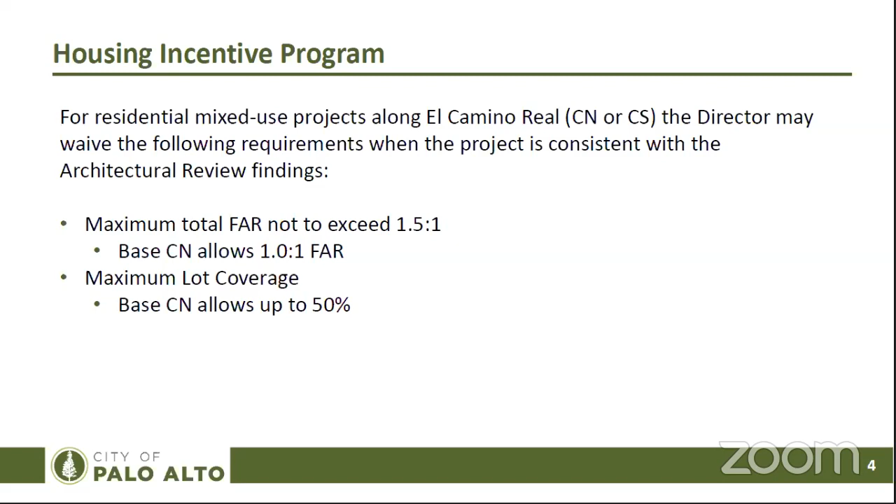So the applicant did revise in response to the board's initial comments the following. They did reduce the office square footage. They put some of that square footage back into the residential units. And in reducing the office space, they were afforded to reduce the amount of parking on the site. So in doing that, they actually added some more landscaping in the rear. You see that in site plans, some permeable pavers, and also 2 larger trees that could be accommodated in that rear parking area now.

Project does formally include about 2,300, 2,400 square feet of commercial space. It's about 0.38 to 1 FAR. That does include some shared space, 3 residential units, totaling 4,500 square feet. So it does include some shared space, and that's 0.72 FAR. The total FAR is 1.1, and the site coverage is 60%.

So some of the notable development standards that's important to show is that in the CN district, you have to, for other projects as well as on El Camino Real, show that you have an effective 12-foot sidewalk. And the first floor of this project is set back about 5 feet to accommodate that. There's an additional 5-foot setback for the street side, which is on Matadero. And so you wouldn't get that in the downtown area. You have a 0 setback requirement there.

And open space covers 35%, and the parking lot shade canopy, we'll get to more detail about that. The requirement is 50%, the maturity at 15 years. In addition to these zoning requirements, you have the South El Camino Real design guidelines. And for properties that are in this retail node district, 75% of the frontage needs to be built to that setback for El Camino Real. And then likewise for the side street, 50% needs to be built to that setback.

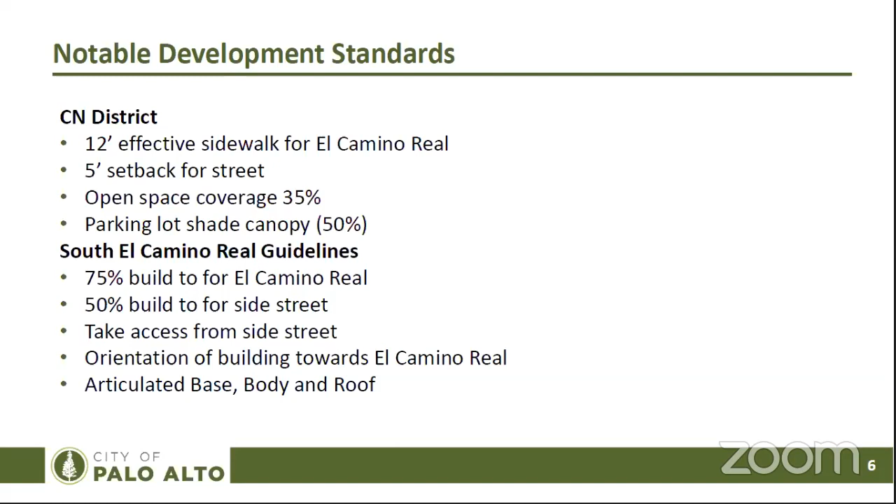So some of the project comparisons from before: the left side shows you what was previously shown, the right side is what's presently shown. And at the board meeting, there wasn't really a direct direction to change necessarily the architecture of the building. It just said to consider the El Camino Real guidelines and demonstrate compliance with those.

So the applicant didn't change the front of the building, but in the rear of the site, as a result of removing some office square footage, they're able to put in some more landscaping. You can notice that there are a couple of trees on the opposite side of the driveway there. There are 2 London planes, so those are actually street tree size trees. So that should make a difference there.

And then here you can see in the site plan view the changes that they made. Again, it's really to the rear, but since they were able to remove one of the parking spaces in the puzzle lift, now you have that extra 8 feet or so of landscaping at the end of the driveway. And that's where they could put the long-term bicycle parking spaces. They moved that from fronting the alley. And then they added the 2 trees there as well.

And you can see in the back where you have all the other utilities, such as the transformer pad, the electrical switchgear, you have the trash area, you have the parking. The surface parking is required. When you have mechanical lift parking, you need to have surface parking. You can't put accessible parking in the mechanical lifts. And you need to also provide for the pathways to these accessible parking spaces.

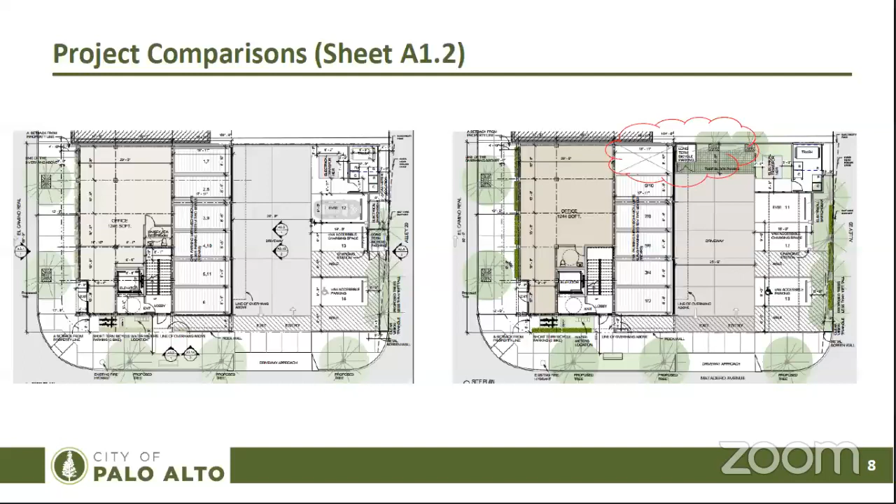And again, as I mentioned, you have the overhead utilities there, so you're limited in the size of the trees that you can put along that alley. So here you can see the project is one story taller than the adjacent properties. The first floor or base of the building is consistent with the neighboring building, maintaining that rhythm and pattern.

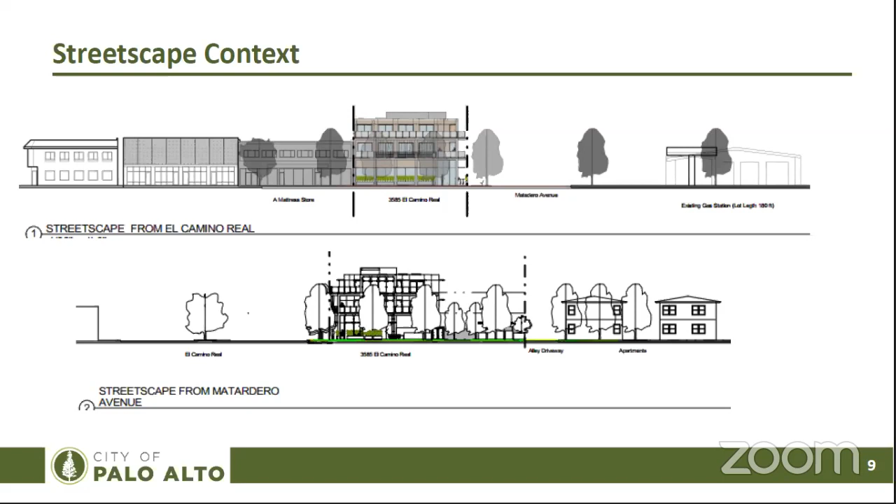So the parking lot shading is a requirement in the parking code, and specifically it states that surface parking areas shall include tree plantings designed to result in 50% shading of those surface areas within 15 years. And it does specify the size of trees that you need to put in there at the time of construction. So this project, again, showing the areas that need to be shaded. That's the driveway, those parking spaces there.

With the revision of the project, the applicant was able to add additional trees at the end of the driveway. These are London plane trees, as I mentioned, the same as the street trees that are proposed. So they'd be really nice canopy trees. And the other trees along the alley are Japanese maples. They're very slow growing. They're small canopy trees. Those are something that the utilities department can allow underneath power lines. The surface spaces are semi-covered spaces with vines growing on the structure.

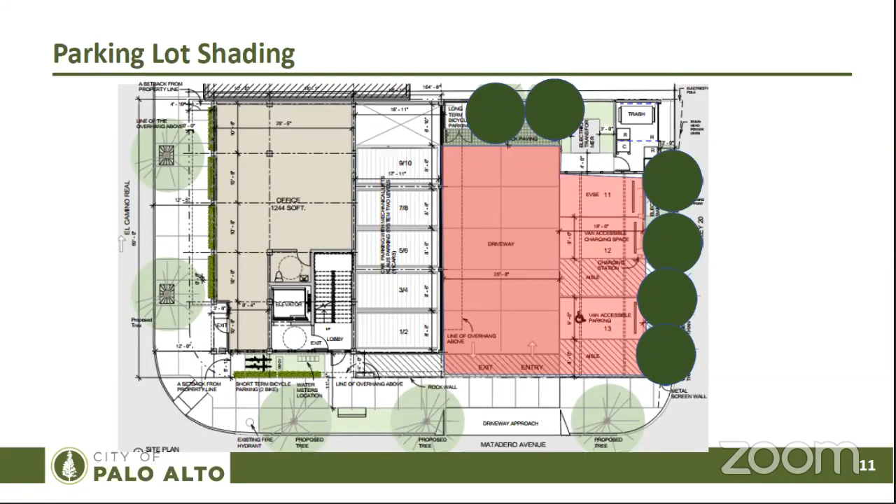And the applicant did look at some other alternatives here. They did look at a basement alternative in the past. You can see on the left, the project would take access for surface spaces along Matadero on the side street, as well as the alley to get ramped down. And you can see with the ramp meeting the code, there's not really sufficient backup space to those spaces. And even if you look at the surface, you still don't even have 50% shading there on the site. So they're still problematic, even when you look at a basement alternative.

Probably could have pushed them in different ways here to see maybe different configurations, but it is challenging given a basement that leads to an alley. The cars coming up that ramp have their headlights into the adjacent residential. That's pretty tough. And the trash space here probably isn't sufficient on the surface here. There's a lot of challenges for having this space be an alternative.

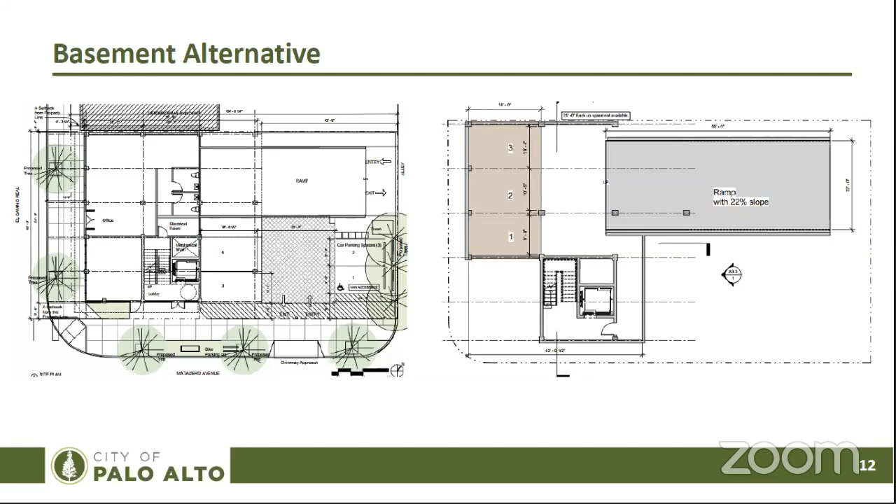And then on the other side of the graphic, you can see how the project puts all its massing along El Camino Real. It's consistent with the South El Camino Real guidelines, putting the parking stepping down to the alley, having that buffer with the residential units.

This is really important if we go down the variance path. This is the first finding that needs to be made, and it's because of special circumstances applicable to the subject property, including but not limited to the size, shape, topography, location, or its surroundings. And so it's not just the lot itself and maybe something that's wrong with it. Like a lot of times you think of there's a huge grove of trees or large boulders that we can't move. I mean, it's also its location and surroundings.

That the strict application of requirements and regulations prescribed in this title substantially deprive such property of privileges enjoyed by other property. And I think that's where we've tried to make those findings in your packet today. And hopefully my presentation will demonstrate that. Some other things about the project: we have below market rate housing. The project will make an in lieu payment for that. That number is 0.45 units, so it's a fractional unit, therefore we're subject to the in lieu payment. Mechanical lift parking also is a condition regarding the operations and maintenance in case there's a breakdown.

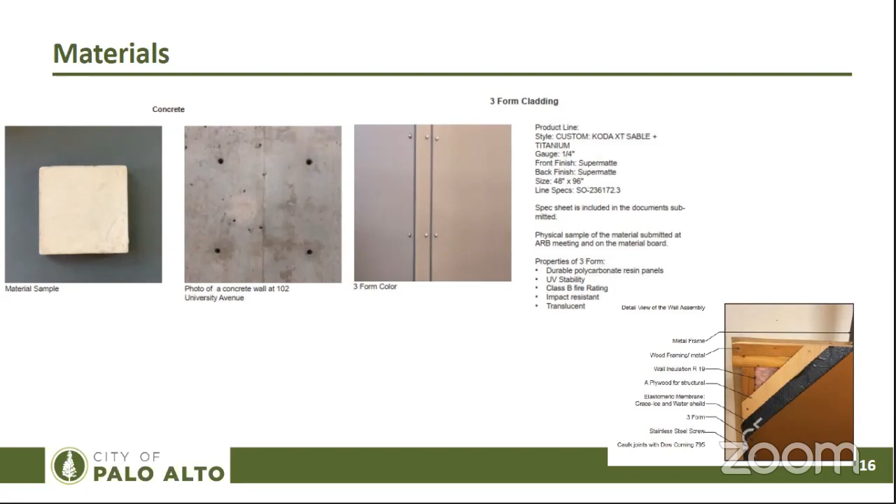And then just going into some of the materials, and the applicant can probably go a little bit more into this. Hopefully you've had a chance to look at the materials at the display case, or they were available online as well. They're using some concrete with slag, which is a more sustainable type of concrete. And there's 3-form cladding, a different type of material. The glass railings and their application here. There's some glass overhangs that are being used as well.

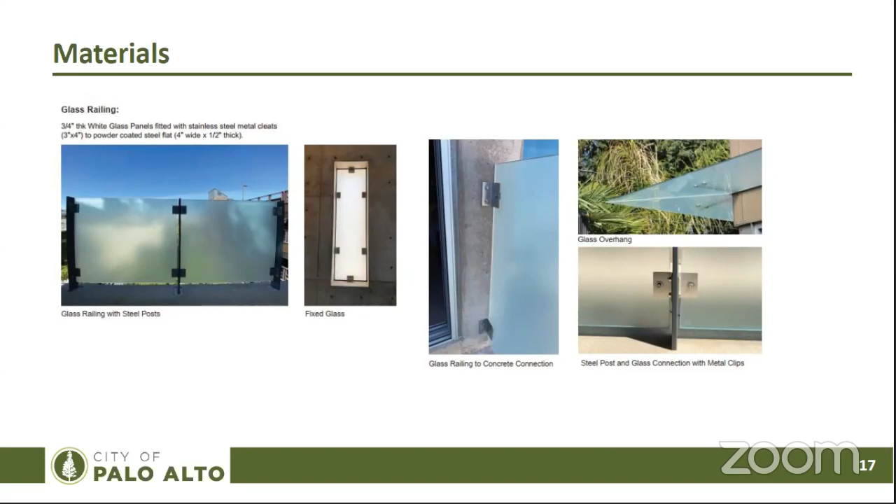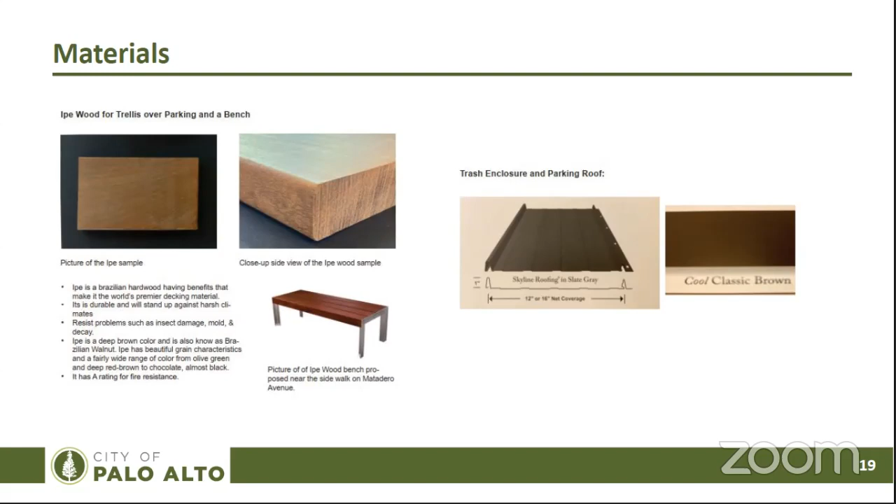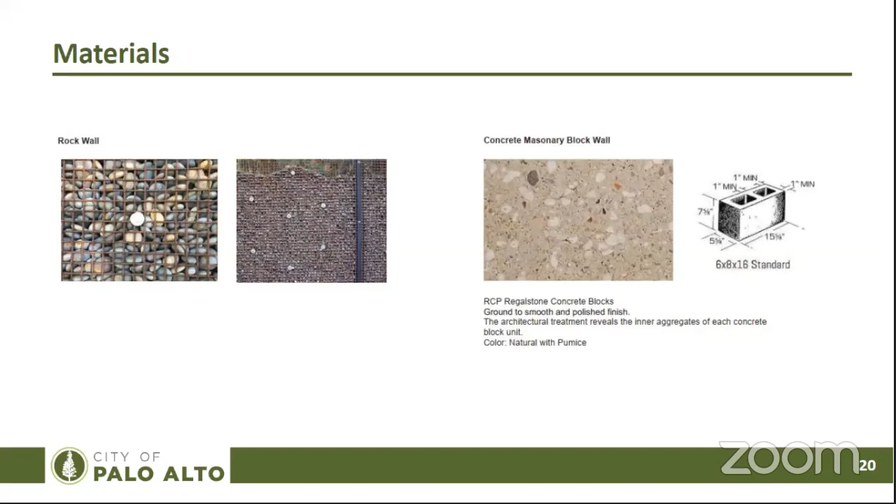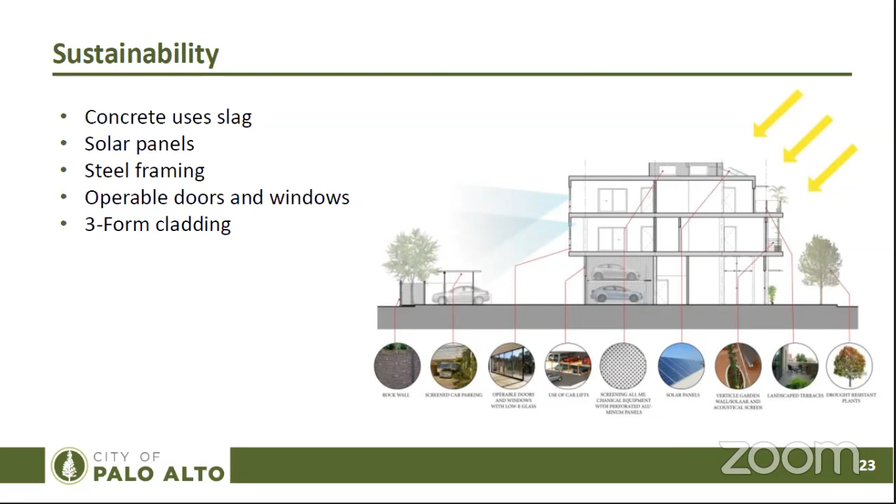And then this is just one of the findings of the architectural review, which is sustainability. The project uses concrete that has slag, which is a sustainable material. There are solar panels on the roof. It uses steel framing, which is a renewable resource. Operable doors and windows, and that 3-form cladding doesn't require paint, I believe, so it's a little different.

And then for CEQA, we are currently in circulation with a mitigated negative declaration document being circulated from May 1st through June 1st. And the impacted topics are all construction related: air quality, biological resources, cultural resources, some hazardous resources, and noise, more specifically vibration. And all these mitigations proposed can reduce these impacts to less than significant.

So in conclusion, we want to conduct a public hearing. The project did respond to the ARB comments. The project is consistent with the architectural review findings. We want to consider those variance requests by the applicant, and we want to complete the CEQA process. So the recommendation is to review and consider the initial study and mitigated negative declaration, and I recommend approval of the project to the Director of Planning and Development Services based on the findings and subject to conditions of approval. So that concludes my presentation. The applicant has their presentation, which I will operate, and then we'll go ahead and get to any questions you may have.

Thank you very much, Sheldon. Does any board member have a question for staff? Yeah, I have one. Go ahead, David. The enclosure for the long-term parking in the back, is that a requirement for the retail or the residential portion of the building? It's for both. They're both combined there. Okay. Any other questions?

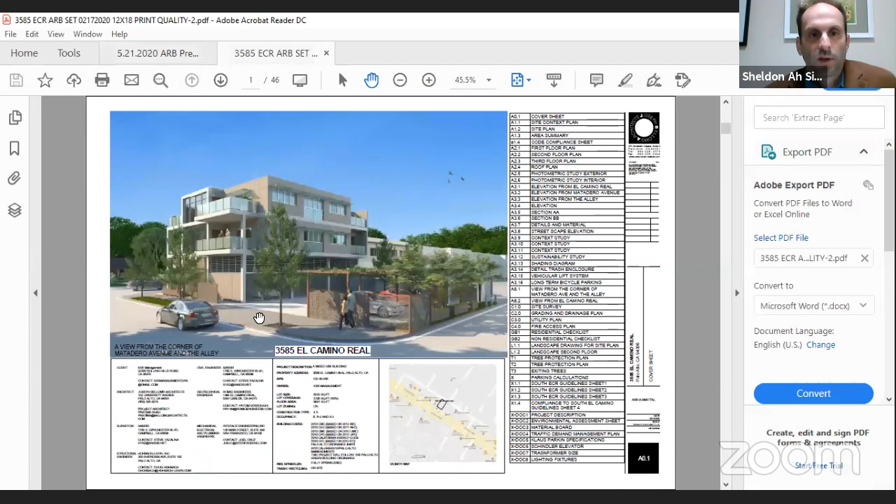I asked this because on the applicant's drawings, it seemed that they were including a much larger area for what the surface parking area was. Can you say what percentage is actually shaded with the application right now? To what extent are we asking for a variance? Yeah, I think if we look at that sheet, we're showing like 200 square feet of the parking lot being shaded. So it's a very small percentage.

I know they have another exhibit, but basically that 200 square feet is in this area here. These areas, they're not included. These other areas are not included. So really, it's a very small area that's included. But can you say what the percentage is? The code says they have to be 50% shaded. What percent shaded are they right now?

Yeah, I'd have to look at that sheet, and I think while the applicant is giving their presentation, I just have to do the math here. But again, they're only doing this. This is the only part that's shaded. So we just need to take this area here, and this. I mean, it's very, very small. It's not very much, but I can get that for you. Okay, thanks. Any other questions?

Osma, no? Then can we go on and see? I have a question about that issue, Peter. I thought it was stated in the text somewhere that the shading is about 26 or 27% relative to the 50% requirement. That's the number I'm looking for. Sheldon, it seems hard to see how that would be 25% on this drawing in front of us. Yeah, I think if you give us a minute, we can find that number for you, maybe after the applicant presents. That's great, Jody. Yeah, just at some point as we discuss this.

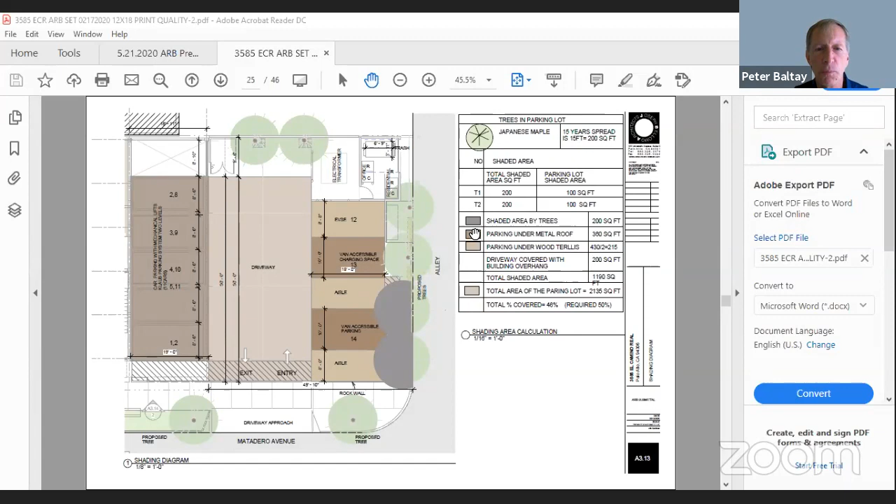With that, can we move on to the applicant presentation? Do we have the applicant here, Vin? Could you get them on board for us, please? Yeah, so I believe the applicant is Pratima and Joe. So I'll go ahead and promote those two to panelists so that way they can speak and also share their presentation.

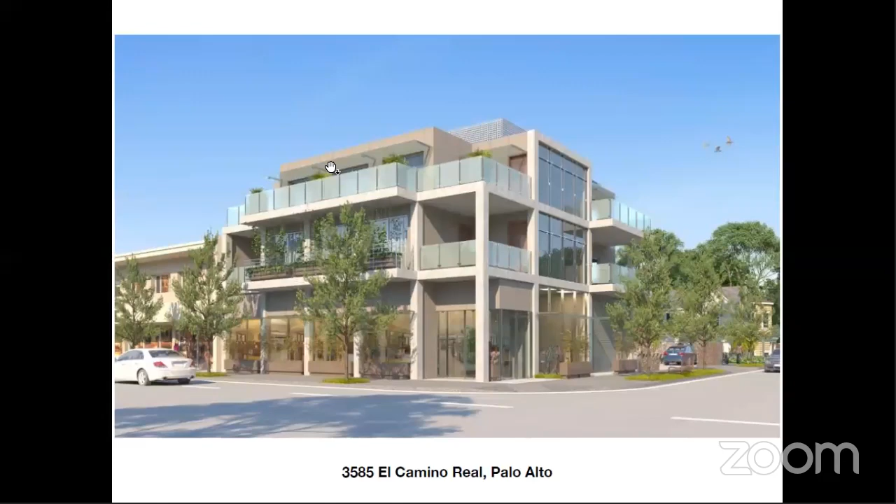I hope they speak clear. And Vin, I can hardly understand you. Oh, I'm sorry. Can you guys hear me now? I hear you, but you're still not clear in my hearing. I can hear you pretty well. Maybe consider raising volume. No, I'm fine on volume. Peter, you're muted. Joe and Pratima, I see you have joined the meeting as panelists. If you can connect your audio, you can speak. Welcome, Architect Palomo. Joe, there seems to be a lot of echoing on your side. Are you perhaps running the meeting on TV or another computer? Sounds like two sources of audio. It looks like Joe just exited. Pratima, are you there?

Yeah, since both of us are in one room, I will be sharing my presentation and my mic, so we don't have echo. Okay, sure. Thank you. Please take your time until you're ready. The technology can be challenging and we're very eager to hear your presentation. Can Joe log in after my presentation again? He can log in now. He just needs to mute himself if you guys are in the same room. Yeah, we're in the same room. Just give us a second. Can they hear us now? Yeah, they can hear us. You want me to start it off then? Please go ahead whenever you're ready. Give us just a few seconds and then I'll start. You can hear me, correct? I can hear you fine. You will have 10 minutes whenever you start. Okay.

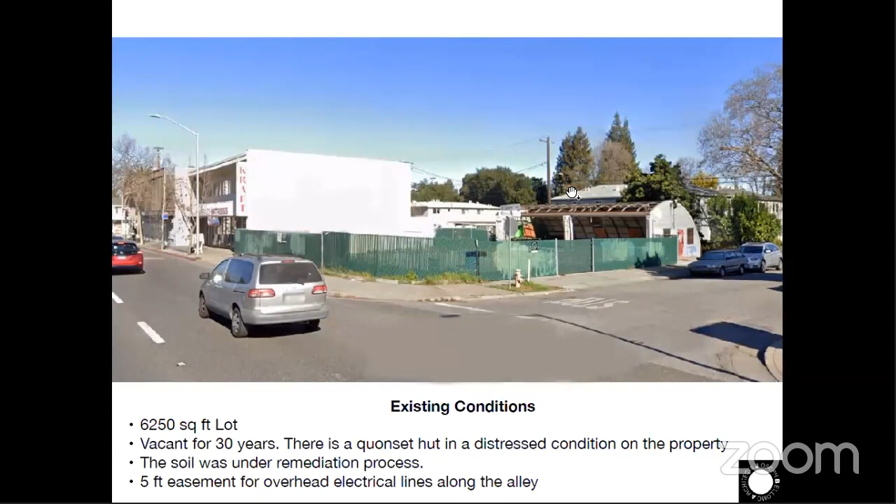The size of the lot is 60 feet by 104 feet. That is about 6,250 square feet. It is a standard size lot for a single family home and a substandard lot for a multi-family mixed use building. The lot has been vacant for the past 30 years because the soil was contaminated and had to go through the extensive process of remediation. Now the site has clean title from the County of Santa Clara.

Next. The design proposal that we are presenting today has evolved after considering different design programs and working with the consultants, city officials, and our clients. I would like to summarize the design proposals we submitted previously. Our first formal design application was in August 2017, where we proposed a 3-story mixed-use building with 2 office spaces and 2 residential units. There was a conflicting requirement of the zoning code for this property.

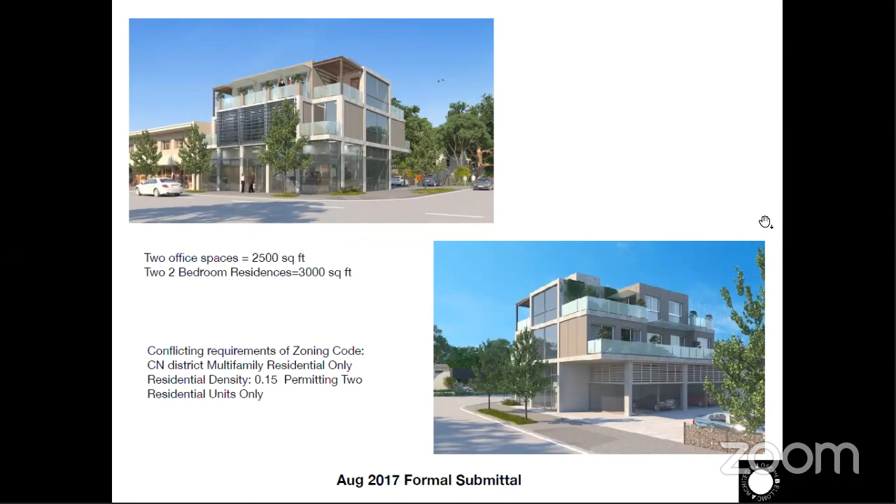The CN district only allowed multifamily residential, that means 3 or more units, and the permitted residential density only permitted 2 residential units, and we had proposed 2. So there was conflict in the zoning requirements itself. Next. We explored other design options for the program, like a 2-story office building only. But an office building had more stringent setback requirements, such as 20 feet from Matadero Avenue. That's approximately 1/3 of the site.

And we also would have lost the opportunity of adding the most desirable housing in the city. We tried the option of a basement with a ramp and a third level of mechanical lift in a pit. Both options were discarded because of the remediated soil condition and to keep the excavation to a minimum. At this point, we had many constraints and we were really concerned about the economical feasibility of the project.

Next. And that's when the housing incentive plan was announced by the city council, which helped us a lot during this process. The following incentives: first, increased residential FAR, then reduced car parking requirement, like one car parking space for a 1 bedroom unit instead of 1.5, and more than 50% site coverage is permitted. We were able to take advantage of these incentives and propose the design, which works for clients as well as the city. Next.

There is no major change in the design program from the previous proposal. The proposal includes 2 office spaces around 2,374 square feet and 3 residential units around 4,500 square feet. In the previous proposal, a variance was requested for 5 feet perimeter landscaping along the parking lot. We have fulfilled this requirement by adding an 8-foot landscape strip at the end of the driveway along the neighboring property.

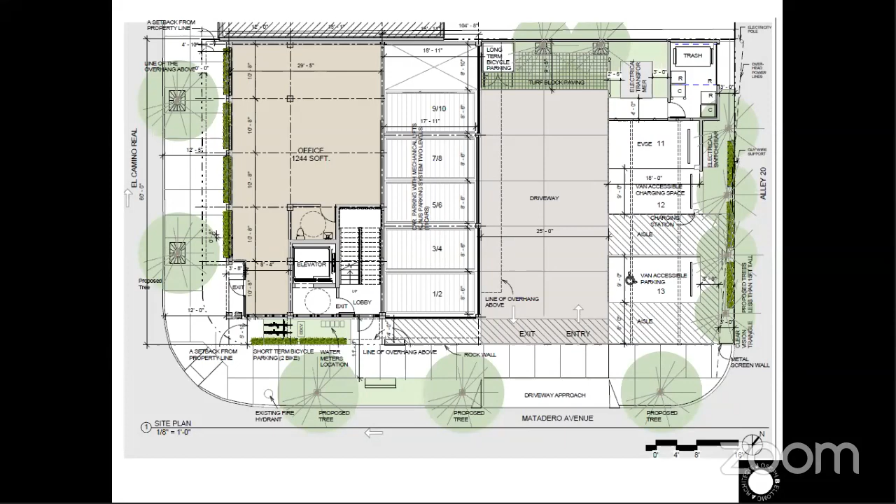Next. The design proposal includes 10 car parking spaces with mechanical vehicular lifts, while 3 car parking spaces are on grade. These on-grade car parking spaces are mainly for the commercial portion of the building, as David asked. Residential will have designated parking in the car lifts. The bicycle parking has been relocated from the alley to the space in front of an unused bay of the car lift system. During the previous ARB meeting, there was a comment or discussion and concern expressed about the alley streetscape.

Relocating bicycles at the new position not only makes the bicycle parking safer, but also provides a continuous landscape strip along the alley. There is a 5-feet easement on the alley for overhead electrical lines. Though we have this restriction, we feel we have created a design solution which beautifies the alley. 4 Japanese maple trees and removable planters demarcate the boundary and beautify the alley, plus create a desirable buffer between the alley and the parking area.

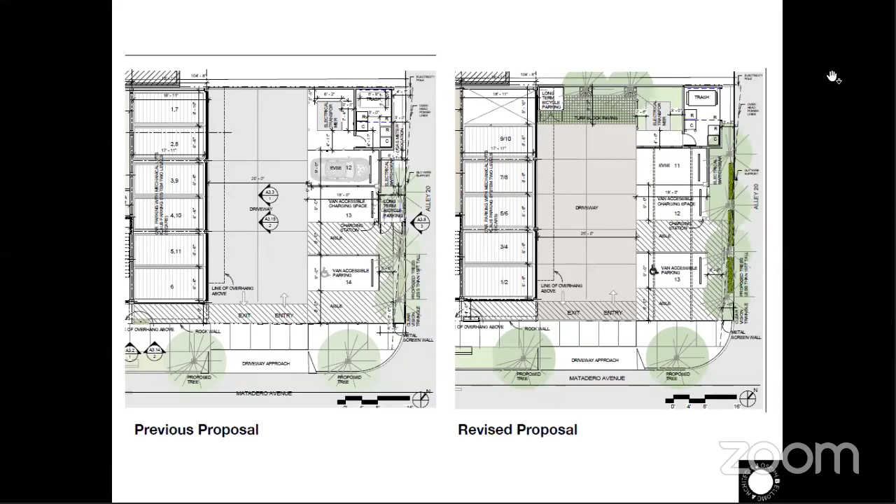Next, another change we are proposing is for the shading of on-grade parking, surface parking. The earlier design proposal included a continuous standing seam metal roof for the car parking area. In this proposal, we have a combination of standing seam metal roof over the parking area and ipe wood trellis or pergola covered with creepers over the aisles. This combination roof will provide required shading for the parked cars. The trellis and the vines, which is an interesting landscape element, will create beautiful views for the users and the neighbors, as well as reduce the heat island effect.

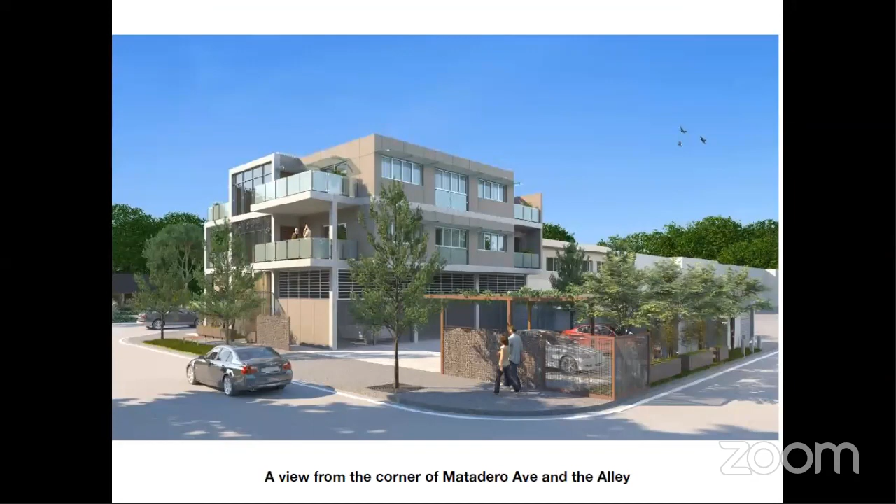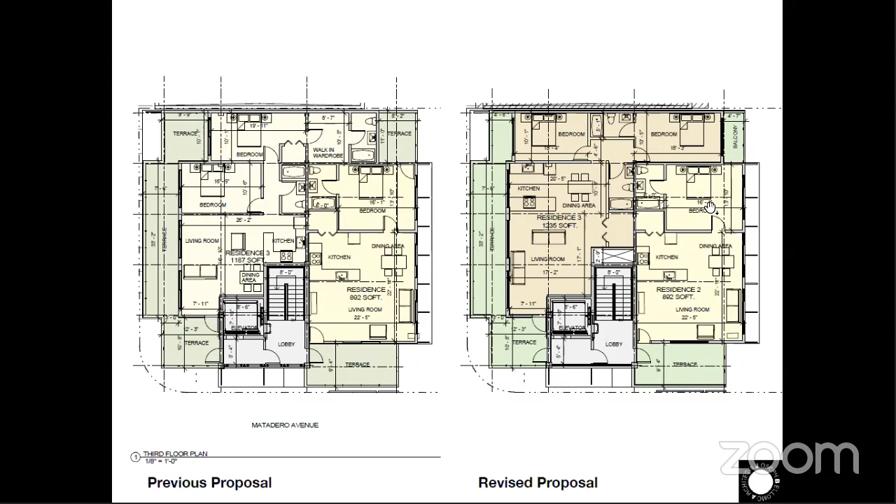Next. The next couple of slides show the revisions we made to the floor plans. Since we reduced 1 car parking space, we had to reduce office square footage on the 2nd floor by around 150 square feet. We have compensated this reduction in office square footage by adding more square footage to the residence on the 2nd floor. Next. On the 3rd floor, we have reduced the size of the 2 terraces, which were closer to the neighboring buildings, and have increased the square footage of residence number 3. We are still able to fulfill the requirement of 150 square foot of open space per residential unit and overall landscape or open space, as we have added more landscaping on the ground floor. Next.

Now I will proceed with the response to the ARB comments. We have submitted a virtual material board which has pictures of the material samples, brief specifications, construction details for a few materials, and pictures of the materials in use at our previous project. A physical material board was submitted at the previous ARB hearing and now at the plaza. We have a mock-up of a 3form wall and a 3form edge detail and a connection detail of steel frame and glass or 3form panel. I will show these mock-ups once I connect to the camera. Next. This is the picture of the mock-up and the slides.

Next. There was a concern expressed on how the building responds to its surrounding residential neighbors and the location of the trash enclosure. As explained previously, the design has a beautiful landscape perimeter strip along the alley. The view of the parking is screened with movable planters, Japanese maple trees, and rock walls. The standing seam metal roof and ipe trellis with creepers form an interesting roof pattern. The entry of the trash enclosure is in front of the staircase of one of the residential buildings, and it's not right in front of the door. The trash enclosure is fully enclosed with an overhead rolling shutter. The vehicular entry and exit to the site is from Matadero Avenue, thus it reduces impact on the alley traffic.

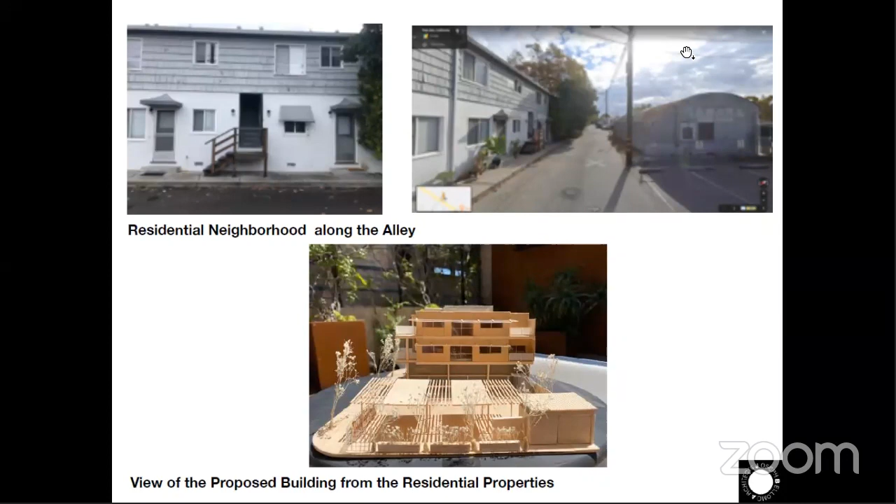Next. As mentioned in the previous hearing by the city staff, today's ARB discussion focuses on the South El Camino Real guidelines and compliance to it. One of the main concerns was about guideline 4.1.5, articulated facade, base, body, and roof. As per the guidelines, the building does have an articulated facade and expresses the use of its space. For ground floor office use, the building has an exposed concrete column frame and a concrete slab with glass walls. This maintains the rhythm of the neighboring storefronts.

The middle floor office use has an overhanging balcony with solar screening landscape elements, a vertical garden, which is a distinct feature and relates to the neighboring building. The top floor residence is cladded with 3form and does not reveal the structural system. The residence is recessed 8 feet from El Camino Real and 16 feet in the corner to reduce the massing of the building and relate to the context. So from the pedestrian view, the glass guardrail for the terrace is more visible and acts as a parapet and relates to the two-story neighboring building.

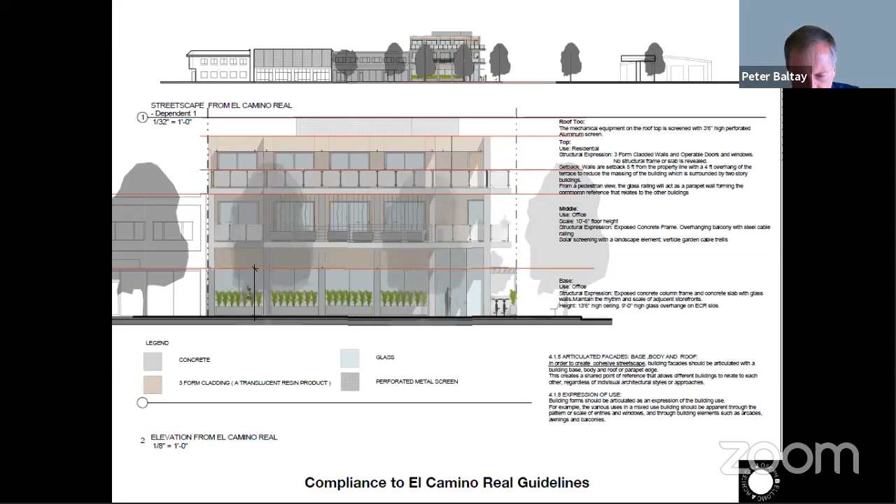The building uses similar architectural elements of the neighboring buildings like storefront, balconies, parapets, and forms a strong connection with them. You're at 10 minutes now. Could you wrap this up within a minute, please? Yes, I'm on the second last slide, so I will be able to finish. Thank you. As per ARB members' suggestions, we explored a couple of design solutions, and we think the proposed is the best one as it satisfies the intent of the guideline and forms a strong connection with the neighboring building.

Next. The main important variance issue about the site is the 50% parking lot with trees requirement for surface parking. I feel we have a unique situation here where 10 of 13 cars, that is 75% of the cars, are parked in the vehicular system and 3 are parked on grade with a shared driveway. The code does not address this situation. There are 13 cars parked. If all 13 cars were parked on the surface, it would have covered 3,800 square feet.

And that is almost, we have reduced 50% of the surface parking area requirement. Code intends to reduce heat island effect by providing shading in the parking with trees. 75% of car parking is under the building and the remaining is covered with landscape elements and trees. Also, it is located on the north side of the property, so part of the driveway will always be shaded, as shown in the picture of the model.

With this, I would like to conclude my presentation. We tried our best to respond to each and every comment, and we are really satisfied with the proposal we have, and we hope ARB recommends this too. Thank you very much for the presentation. Do we have any questions from the board for the applicant?

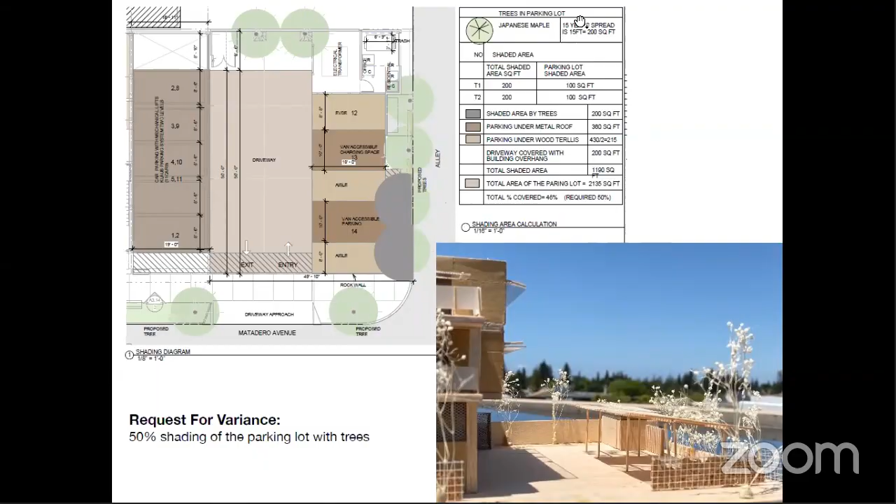Yes. Go ahead, Osma. Well, I wanted to ask, it sounded like there were some mock-ups of the material that we were going to see via video. Is the board interested in seeing that? Okay. I am. Okay, I'll turn the video on and show it. Can you tell me how long is this video? It's not long. I'm just going to show the mock-up by camera. Okay, at the request of Board Member Thompson, we'll look at the video. It's not a video, it's just their camera, so we can see it.

Are you able to see, Osma? Yeah. Okay. So this is the mock-up of the wall with 3form. So we have a steel frame, and Joe, maybe you can explain it. So is that concrete color and that 3form brown color correct in terms of what will be used on this project? So this mock-up we made with the material that was available at the workshop. Because it's a special order, the exact color sample of the 3form was submitted at the ARB meeting.

It looks very similar to the one that I saw on the material board. I mean, the material board one maybe looks a little darker. My material sheet gives exact specifications of the color, and that matches the true color if you see the virtual material sheet. Yeah, I went and I saw the material board. Yeah, and I have to show the other mock-ups too. I'm interested in seeing the corner. Yeah.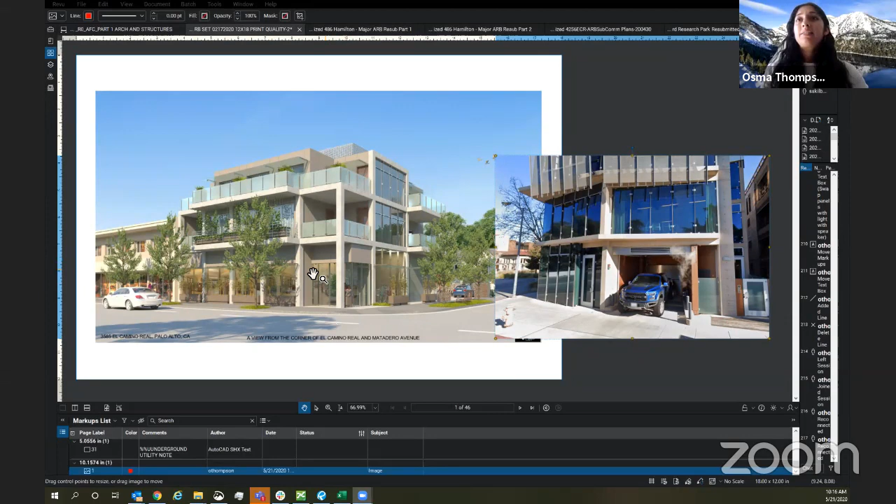And I sort of disagree, Board Member Lee, that the materials change from base to middle to up, because these two materials are consistent the whole way. And I think it's important, even in the elevations, these are really showing kind of like a light sandy color, but they're not a light sandy color. And that's not to say that sandy is better. I'm not saying that. I just would like a bit more transparency in this application as to what this material is and how it will really look on the street.

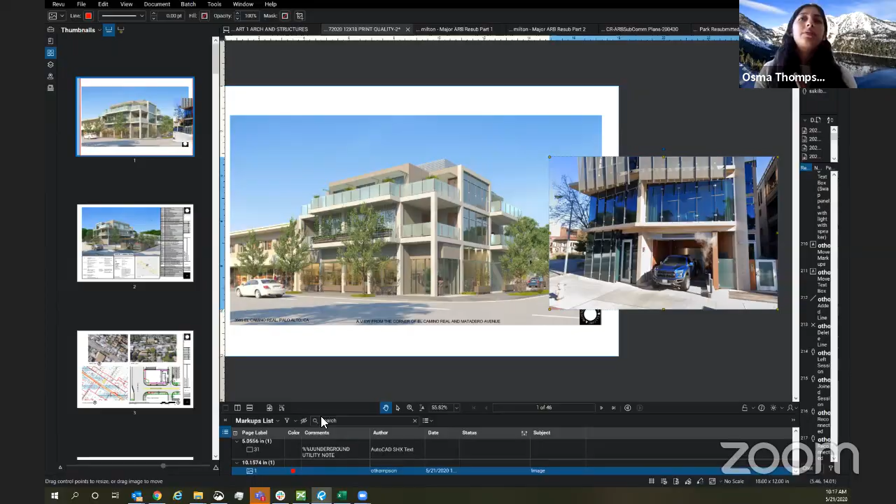And so to go back to the base, middle, and top, I do appreciate Board Member Lee's comments. It actually sort of gave me a bit more perspective, but I do think the top, the roof, is very unarticulated, and I appreciate the setback. I still really like the terracing effect. So it does make the facade at El Camino seem smaller than it really is. But I do think there is some work to be done up here in terms of adding scale and articulation. So I will stop there, because I think that responded to all of the points that we've all been discussing.

Thank you, Osma. I have to admit, I find your comment about the 3-4 materials spot on, and I'm glad we shared your screen. It's dramatic, the difference from the rendering, and I think you're right. We need to see something that shows what that color being much browner and redder like that across the whole building will only tie the 3 floors together, and that might be an issue.

To Board Member Lee, I say that I think we have to be careful assuming staff will monitor things like the kind of metal perforations. I don't think they look at that too much. It says perforated metal, there's submitted perforated metal, it goes through. It's really up to us to do as Alex suggested and get a recommendation, get a specification now that we can hang on. The staff is really looking to us for that kind of guidance. They're repeatedly just asking, and we fail in our job if we don't, at this point in a project, ask for more specificity.

With that, I guess, unless Alex, do you have anything you want to add to the conversation? I'm not looking for a motion now, but I just want to make sure everybody has a chance to talk. Yeah, I don't think I have anything else to add. I would just say that on the base, middle, top issue, I think it does meet the minimum requirements of the context-based criteria and the El Camino design guidelines. And I would say there's room for improvement, but at the end of the day, if push came to shove, I think that part is approvable.

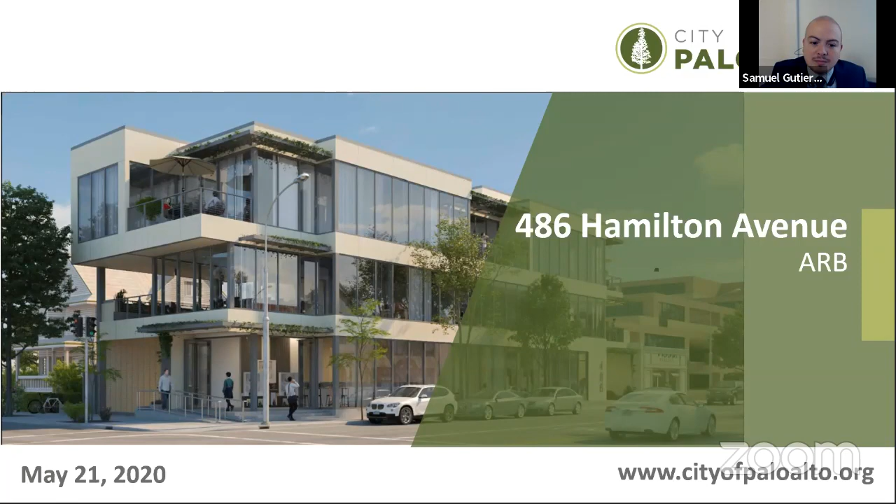Okay, just to verify, can everyone see the presentation? Yes. Okay, perfect. So once again, this is 486 Hamilton Avenue. This is a photo of the proposed project. And we have a little lag there, sorry.

So the project overview: the project is before you for a formal review. In the past, this did come before you as a preliminary application, but currently it is a mixed use project located on 0.12 acres of land. On the corner there, you can see the Google map of Hamilton and Cowper in downtown Palo Alto. It is a new 3-story mixed-use building, zoned CDC with a pedestrian combining district.

The application before you today is kind of a first run at formal. So we do request the Architectural Review Board provide some feedback. There's some discussion about design enhancement, and I'll go a little bit into the parking. We're not looking for a recommendation at this time because this was a preliminary application. We want to see if they addressed the comments from the prelim in this formal before going further down in greater detail and reviewing the application.

So just to show you the zoning in greater detail, here's an overlay of the zoning district around it. Again, it's a CDC with the P overlay. You can see the property identified. There is one of the downtown lots located nearby, and there is a PC just down the street.

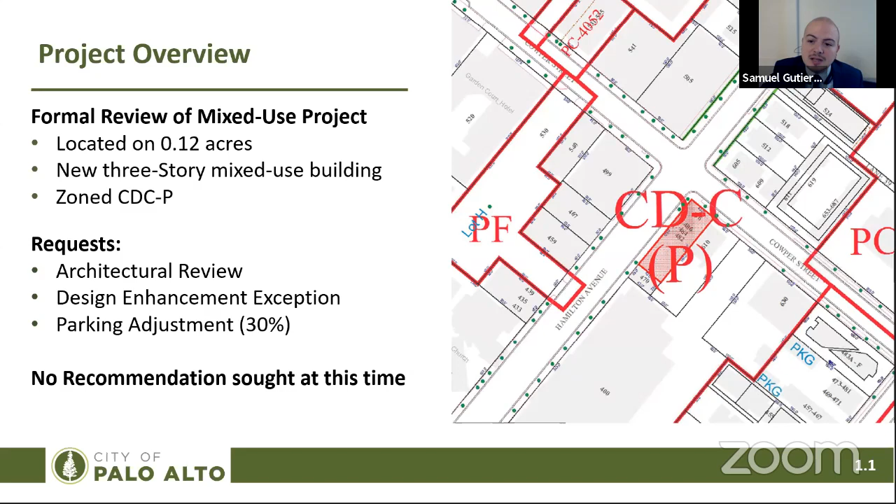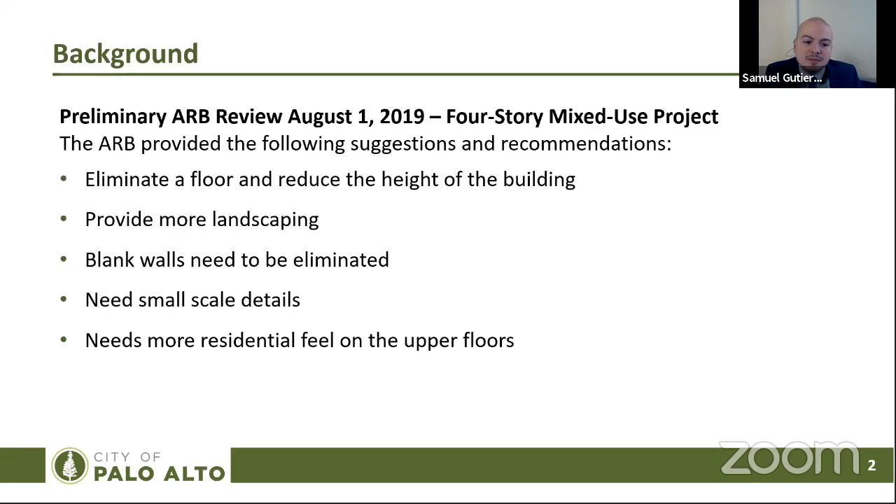So again, background: this project came before you as a preliminary application on August 1st, 2019. At that time, it was a 4-story mixed-use project. The ARB comments were to eliminate the 4th floor, reduce the height of the building, provide more landscaping, and address the blank walls that the preliminary application had presented. The details for small scale needed to be provided, and it needed a more residential feel. The ARB felt at the time that it was a bit more commercial, so that was where that comment was sourced.

Here we have the proposed project. Once again, it's a 3-story mixed use building. So they did eliminate 1 floor. They added basement parking because in the preliminary application, there was surface level parking accessed off of Hamilton. They provided more landscaping through vines and potted plants. They added balconies, and the upper floors appear more residential with better connection to the street.

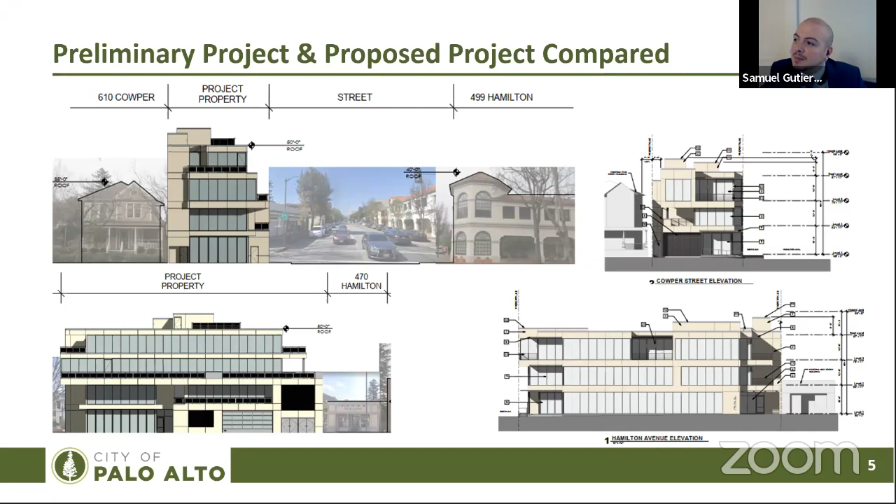Here we can see a comparison between the preliminary application on the left and what's proposed before you today on the right, so we can see the differences. And here again, we have the elevation views as opposed to the rendering. You can see some of the changes on the project's Hamilton elevation, left to right, and the Cowper Street elevation, left to right, the left being the preliminary and the right being the proposed project.

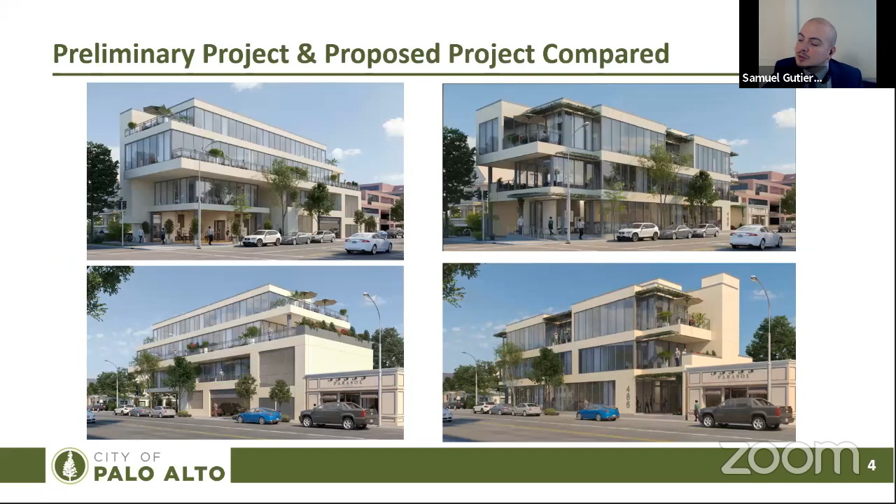Project breakdown. We have a 3-story building. It is offset 1 story from the adjacent building on Cowper and 2 stories from the adjacent building on Hamilton. If you go back here, you can see the Hamilton building is that small parasol building, and on Cowper, you can kind of see in the upper right the Victorian style structure, which can be noticed here on the left.

Moving on, the ground floor has retail because the existing building does have retail space. The ground floor is proposed to have 2,466 square feet of retail. The second floor office space is proposed at about 2,538, and there are 4 residential units averaging about 982 square feet on the second and third floors. The total FAR is 2.0 to 1. The basement parking as configured allows for 13 spaces, a mixture of mechanical lift parking and standard, non-mechanical parking.

Some of the issues we do have are that the stairwell and the elevator shaft encroach into the setback as proposed, and the parking dimensions for the garage are unusual but functional.

The Office of Transportation did review, of course, with planning staff, and the parking does work, but it is a little irregular, and I will go in greater detail. And then, of course, the articulation along the elevations. Before, the ARB in the prelim had mentioned it looks a little commercial and to add more residential feel, so perhaps the articulation as presented might present further issues.

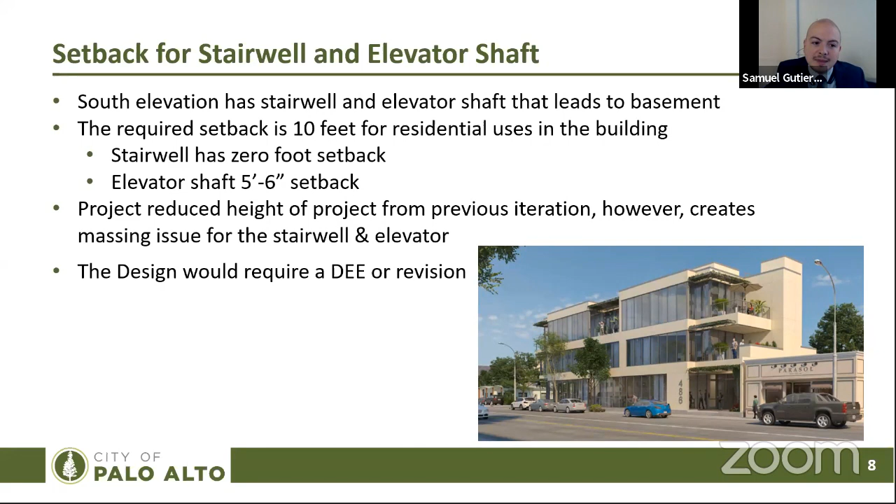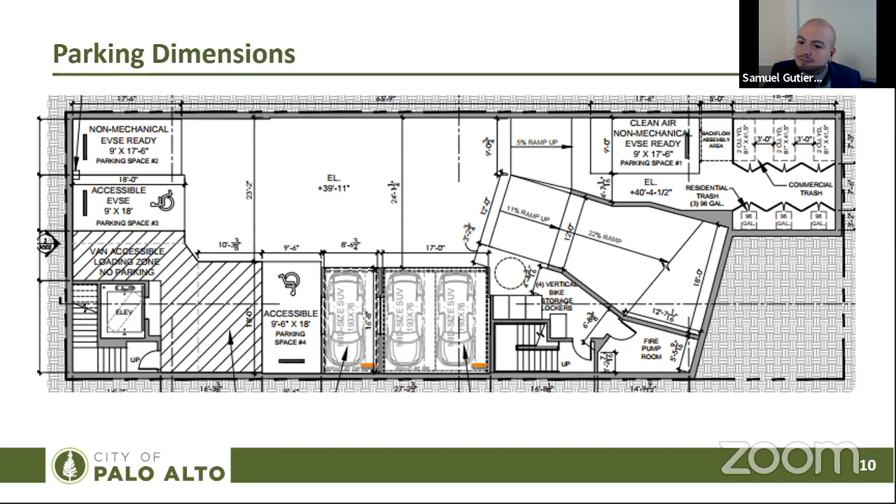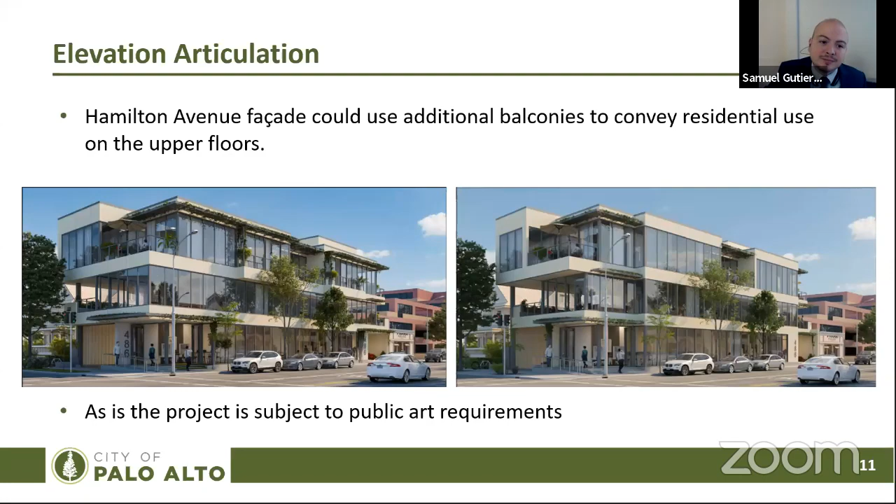We didn't go into deep discussion about it, but that is something that we want some feedback from the ARB on. Of course, it's a part of the ARB findings for landscaping. So I did want to just briefly touch on some of the conceptual proposals that the applicant has put forward for landscaping for this project.

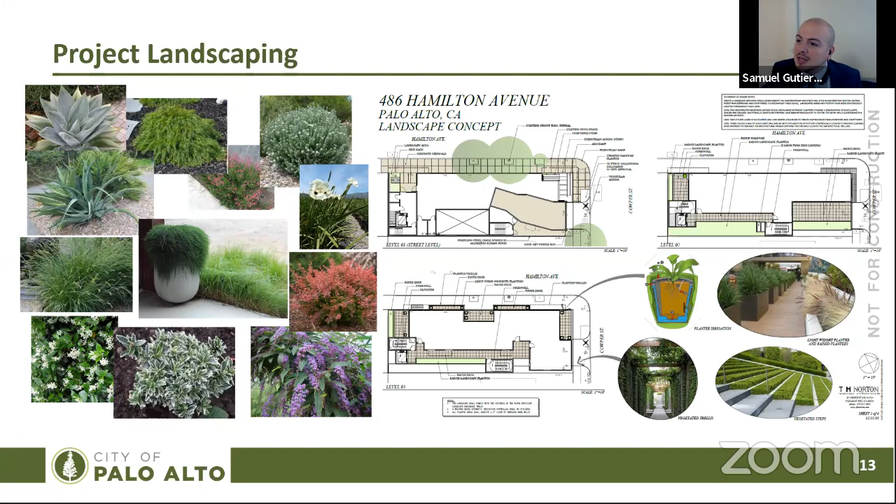Again, it's a little limited because they are building to the edges of the property, so that's something to be mindful of, that if landscaping does go onto the building, it would need to physically go onto the building rather than on the site. Or there would have to be some cutouts or planter boxes integrated, but it still limits where the landscaping can be. Again, this is a preliminary plant list that they're looking at. You'll notice that there aren't very many native plants, but moving forward, we can make adjustments and changes.

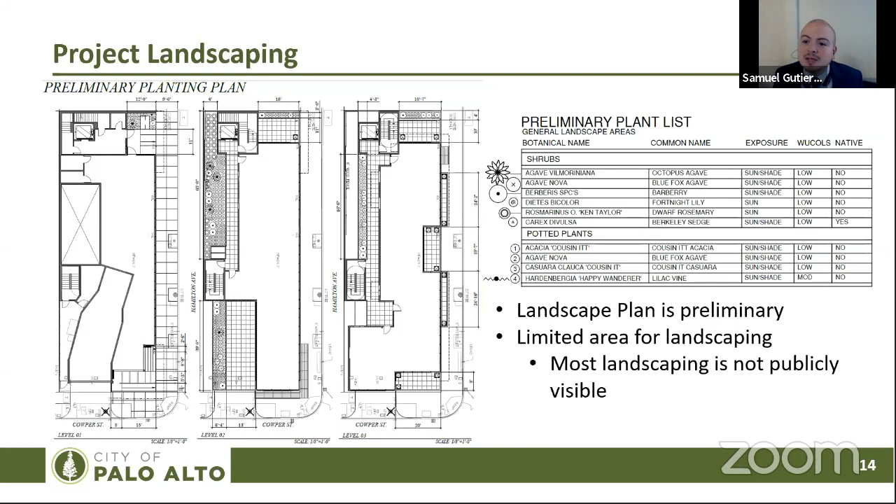So next steps is to incorporate these suggestions and direction from the ARB, complete the CEQA evaluation, which would also include a full evaluation of the historic status of the building, and return to the ARB for a future hearing to integrate all those changes and provide all the fine details. The recommendation before the ARB today is that the ARB consider the proposed project and provide feedback on the project design to staff and the applicant, and then to continue the public hearing to date uncertain to enable the applicant to submit landscape plans and staff to review the project in accordance with CEQA. And this concludes staff's presentation.

Thank you very much, Sam. Do we have any questions of the staff from the board? No one? Very well. We'll move on then to the applicant presentation. Vin, could you ask the applicant if they'd care to make a presentation, please? Sam, who's the applicant for this? Today, I believe it will be Kim presenting. Okay, I see a Kim Tran. Is that right? Yes. Okay, Kim, I will unmute you to speak. Can you also unmute yourself on your computer as well?

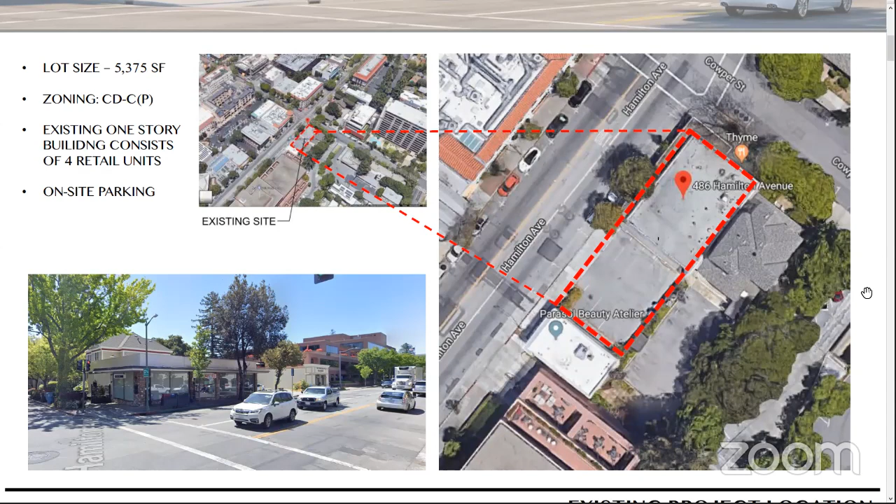What you see before you, as Samuel stated before, is a perspective view of the proposed project at the corner of Cowper and Hamilton. If you don't mind going to the next slide, please. So I just want to talk to you folks about the site itself. It's a wonderful site in a wonderful city. It's a pretty interesting site, but a very challenging site. If you notice, it's only 43 feet wide and I believe about 125 feet long. So it's very challenging to fit any sort of parking or a garage in here.

As you noted, Samuel, previously, the lot size is roughly about 5,300 square feet, and there's an existing one-story structure. I believe there's about 4 retail establishments in there, which occupies roughly half of the property, and the other half is just on-grade parking. I believe there's about 8 stalls there. And then in the lower left-hand corner, you can see that image of what is existing. Samuel, do you mind going to the next one, please?

So what we propose here is a 3-story mixed-use project, with the ground floor being roughly about 2,100 square feet. And we have roughly about 1,700 square feet of office space, which is located on the 2nd floor. And then the remaining usable square footage goes to 4 3-bedroom residential units here. So the total gross floor area is roughly 10,750 square feet. Do you mind going to the next slide, please?

So again, this is just a view of the proposed project there at the corner of Cowper and Hamilton. And in our preliminary presentation, I guess we showed our renderings at the very last moment. And one of your first comments was, hey, show it in the beginning, get us excited about it. So here we are. So many of the comments that came from that preliminary meeting was that, I think Chairman Peter, you stated it was a little bit too tall. You would not recommend it to be passed if it was 4 stories tall. So we took a look at that. We dropped it 1 floor. If you go to the next slide, please.

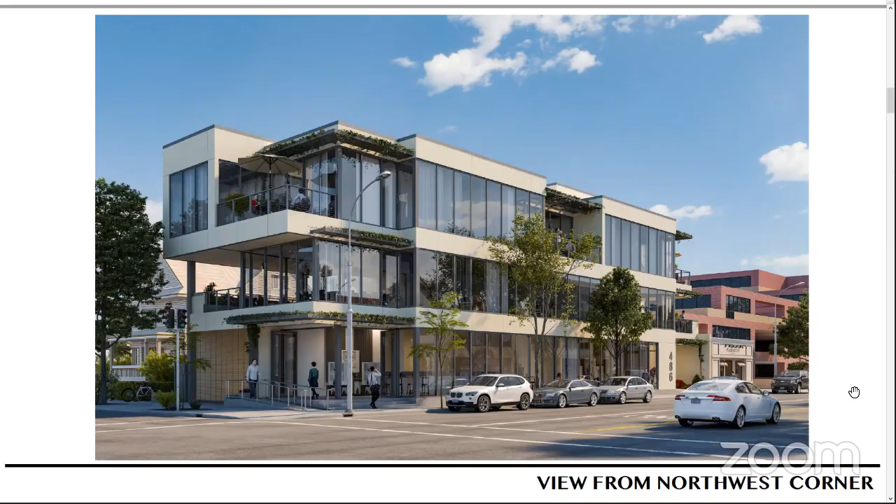And then board member David, you also mentioned that you don't want to see the parking or the garage parking entrance along Hamilton. That should be for retail or some other commercial activity there. So we took that into account, and what we did was we moved the parking and the parking entrance onto Cowper. And you see on the right-hand side, the entry to the parking garage is right at the corner of Cowper and Hamilton there.

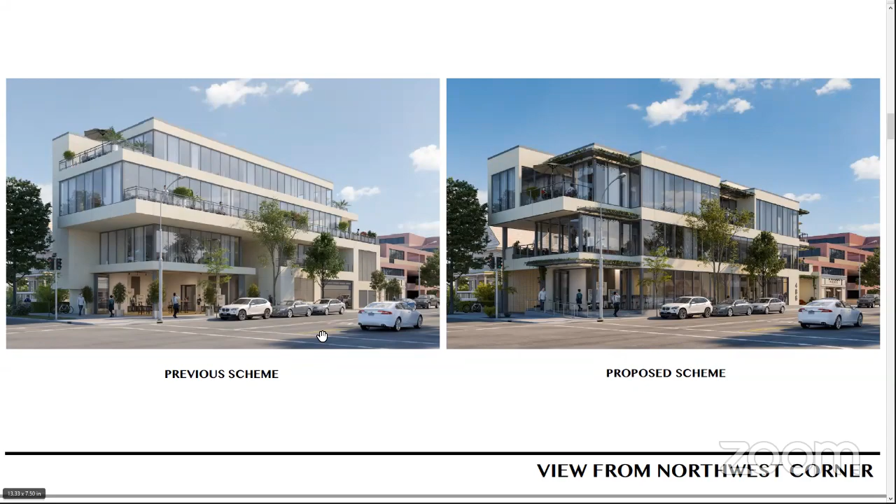And what you see here is a view from the west of the property here, looking down Hamilton there. And we broke up the facade quite a bit. And if you can go to the next slide, you see a comparison with what we had about a year ago on the left-hand side there. You see how the parking garage dominated the Hamilton elevations and facade there. That whole experience was interrupted with that garage entry and whatnot. So we went back to the drawing board and revised everything. Actually, it was pretty fun doing all this stuff.

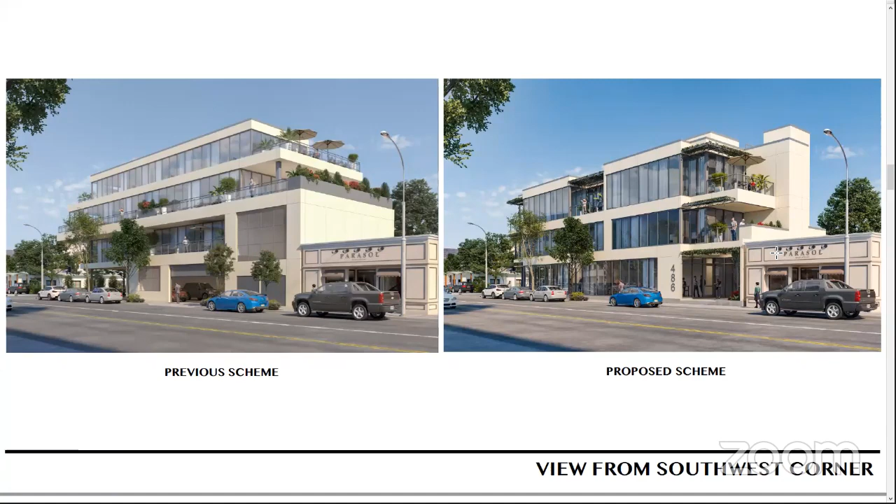And then we put the garage entrance, as I mentioned, along Cowper, and put the building entrance along Hamilton there. And if you notice on the right-hand side, you see how we stepped everything and made everything a little bit more residential scale there. Can you go to the next slide, please? So what you see in front of you is a comparison of the old plan and the new plan. The proposed plan, which we're proposing today, is on the bottom, and the previous plan is up top there.

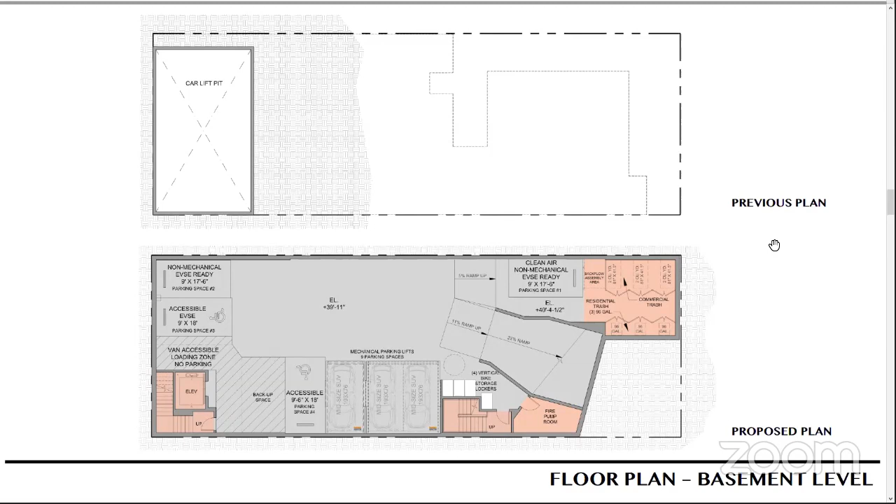So as I mentioned before, previously there was parking along Hamilton Avenue, and the garage entrance was on Hamilton Avenue. So that was a huge experience. As you walk past that, you'd see just a garage and car entrance. So what we did, per your advice, is we took the entrance and the garage and came off of Cowper, which is on the right-hand side, and went down into the basement. So if you go to the next slide, please.

And one of the other comments, I believe, board member David, is that you didn't want to see all the trash and recycling as you walk along Hamilton Avenue. And if you look at the previous plan, that's where we had it, along Hamilton Avenue, and then you have the entrance to the parking garage. So we took all that stuff and put it downstairs. So it's a much more pleasant experience as you walk along Hamilton.

What you find now is that you're gonna walk past a nice little garden and the entry to the building, and then the retail there. We managed to fit all the retail on one level. In the previous plan, it was split on 2 levels, so it wasn't a continuous retail experience. So right now, the retail occupies pretty much 90% of the Hamilton walk-in experience here.

And one of the things that, in our minds, what we wanted to do was we wanted to open up Hamilton and Cowper as much as we can. In the original plan, it shows a lot more, where we just opened up the corner with bifold doors and nano doors, a lot of landscaping and whatnot, and just leads you right into the retail experience.

We still have a hint of that on our proposed plans there. We have beautiful, nice landscape stairs coming up into the retail experience. So the retail has 2 entrances, one from the left-hand side and one from the right-hand side at the corner, which we think is really important. Can you go to the next slide, please?

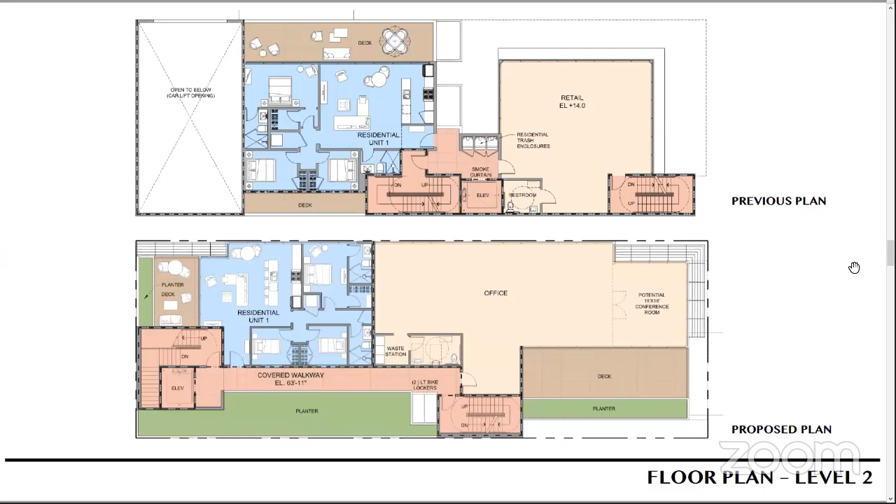In the corner of Hamilton and Cowper, there's a nice big balcony for that resident. In the middle, there's a nice balcony there for them too. And on the left-hand side, on the west, you see another nice balcony there. If you go to the next slide, please.

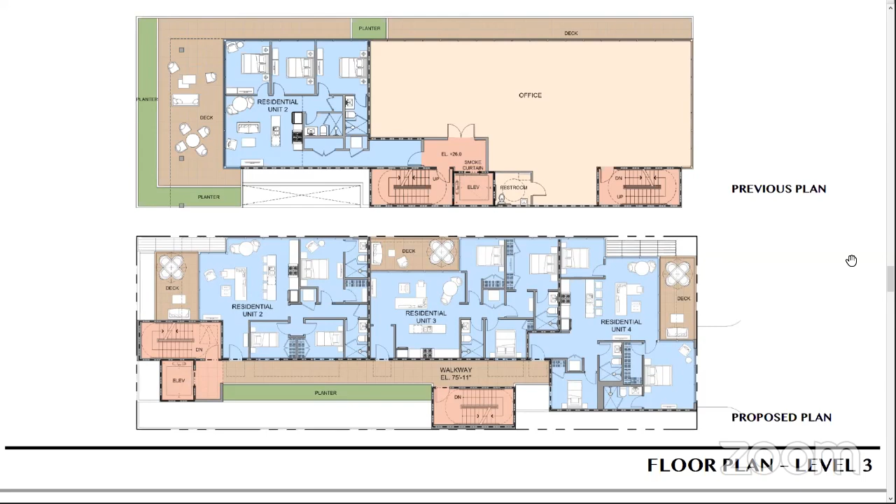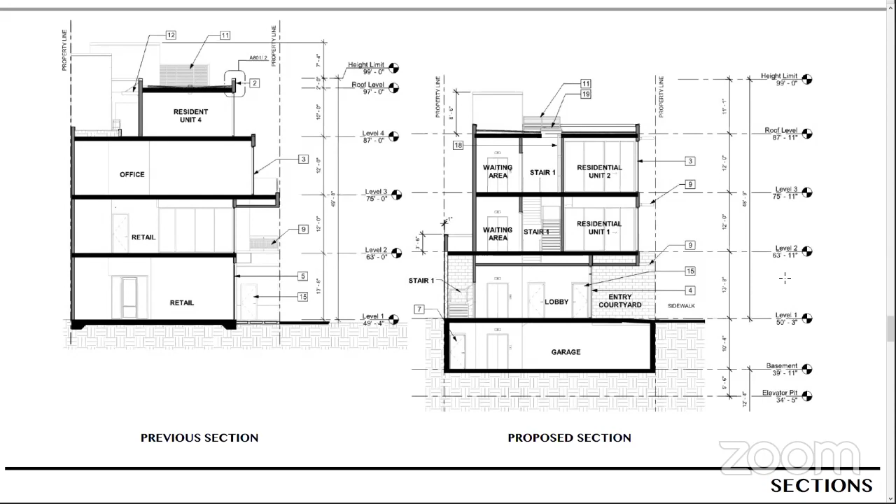Here it is. As you can see, the comparison, the previous section on the left-hand side and on the right-hand side, you see the proposed section here. And you see how we took the garage and we made that subterranean. And then all the residential is on the third level and the second level. I think it's 50 feet for the previous project, and our current one is 39 foot 10, I believe. Yep. Can you go to the next one, please?

We're starting to approach 10 minutes.

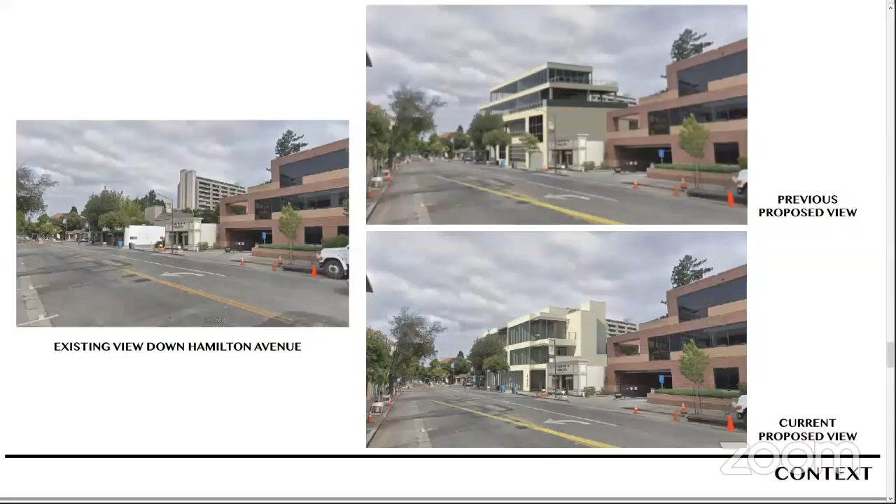Oh, I'm almost done. So again, this is another view from Hamilton here, showing you the differences between what we're proposing right now and what we had previously, and notice how much smaller it is. Get to the next slide, please. This is just some elevations of what we are currently proposing, and you see all the ins and outs of this building now, on the left-hand side, the middle, and the right-hand side. Next slide, please.

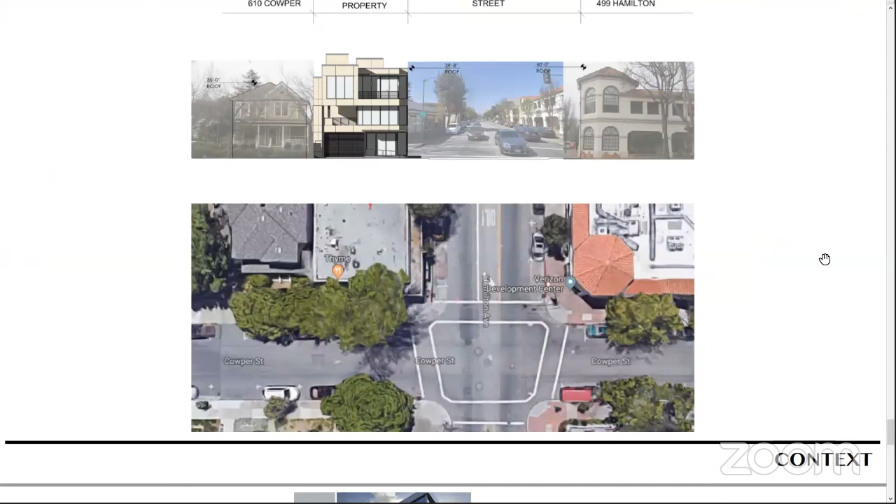Again, this is a view from Cowper here. Next slide, please. And this shows you the materials that we're planning to use here. We're thinking about some stucco, and also we're wanting to add some eyebrows, aluminum arbors and whatnot, so we can hang a lot of greenery along there just to soften up the building a little bit. And board member Osma, you mentioned before that our railing system looked a little bit too cheap. I think it was a grid system, a mesh. So we changed it out to a more stainless steel railing system. Next slide, please.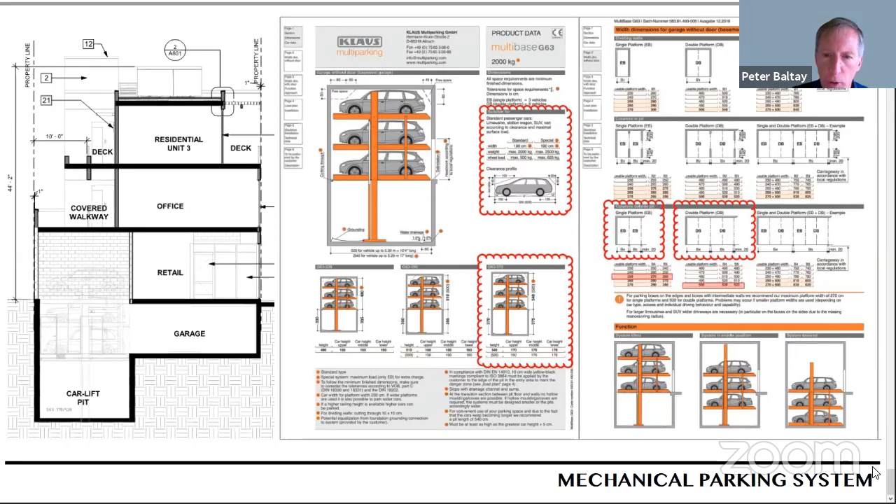With that, do we have any questions of the applicant from the board? Could you clarify for me then, please, the height of the third floor, the residential floor, and the second floor? When I look at the renderings, it looks like the third floor is taller. On your sectional drawing, it's showing both as having a 12-foot floor-to-floor or floor-to-ceiling height. Is that correct? What are the relative heights of those two floors, please?

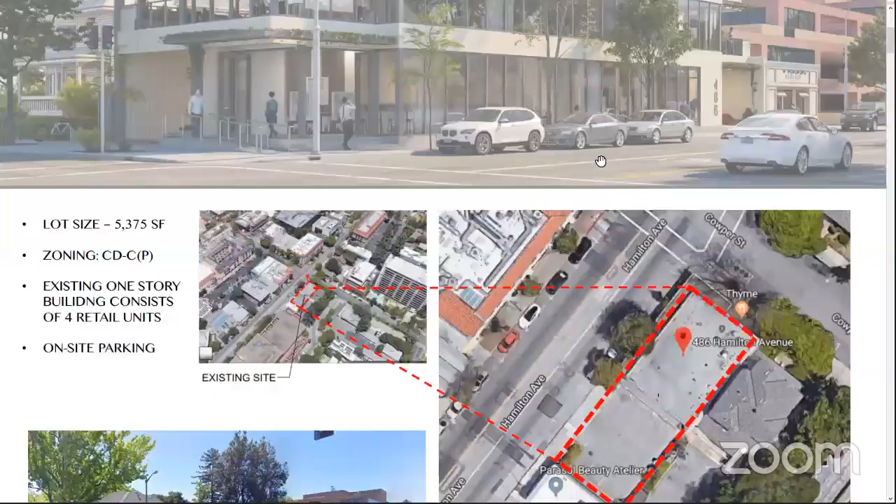Chairman Peter, you're absolutely correct. They're 12 feet each. Maybe it's the perspective that the model builder built this at. Makes the top level look a little bit taller. But you're absolutely correct. It's 12 feet. Okay, thank you very much.

Okay, Vin, do we have any public comments for this? I'll open the meeting to public comments right now. Oh, we do have a member who just raised their hand, Jeff Levinsky. If there's anyone else who wishes to speak on this item, please raise your hand now. Otherwise, Jeff will be the final speaker. Jeff, I have unmuted you. Can you please unmute yourself on your computer as well? And then you may speak after you identify yourself. Okay, this is Jeff Levinsky. Good morning, board members and staff.

Several of us neighborhood people sent in a letter pointing out some concerns that we had about the project. One of those is that the calculations for parking appear to have been done not including the shared commercial space. And I heard different numbers even in the presentation and staff's numbers for the size of some of the spaces that differ from what's shown in the plans. So when this comes back, we hope that that would be considered. We also pointed out some concerns that aren't addressed about how the parking will be assigned between the different uses, as that has an impact on the floor area of the building.

A point that was not in the letter, and is not addressed in the study done by Hexagon, is that the amount of parking the building has to provide is being reduced thanks to a 1,500 square foot reduction through a special provision of the city code. But that doesn't reduce the number of cars that will be looking to park. It's simply a reduction of how much parking the building is required to provide. This neighborhood is heavily overparked.

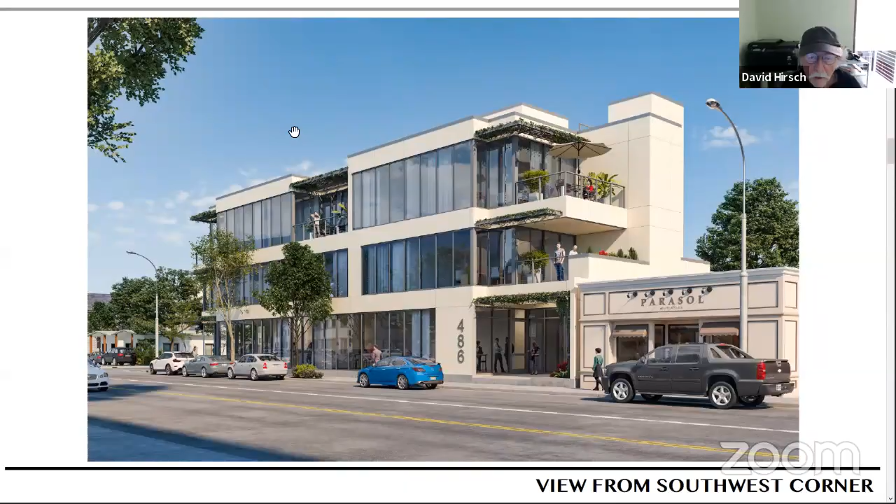But the fact that it also isn't going straight down to the cellar really affects the plan of the commercial first floor and its entry area there as well, and kind of interrupts the commercial on the ground floor. So I'd be looking for a further study of how it works. But it certainly is a significant improvement over what was in the first case. Reducing the level, as we had recommended, is excellent.

One of my main concerns, I'll just get to it now, is the way in which garbage was collected in the previous scheme. Now we have some of the garbage being way to the other end of the cellar, way too far away. I don't know why it isn't possible to have that located somewhere off of the lobby, even if it steals a little space away from the commercial.

But my biggest concern here is the mix of the second floor, the fact that it's a commercial space and a residential space. It really bothers me; it would be so much better if it were all residential. So where there's a kind of zoning reason for it... Oh, okay, so that's what you're showing. I think the garbage removal needs to be studied somewhere. Anyhow, get on from there.

The other aspect of it is this mix of commercial on the second floor. Access to it is through the main lobby, up the elevator, down a very long corridor. I think either you eliminate it and make residential on that floor, following the plan on the top floor, or you find some way of duplexing the commercial on the ground floor so it works with what's upstairs, making a larger single user.

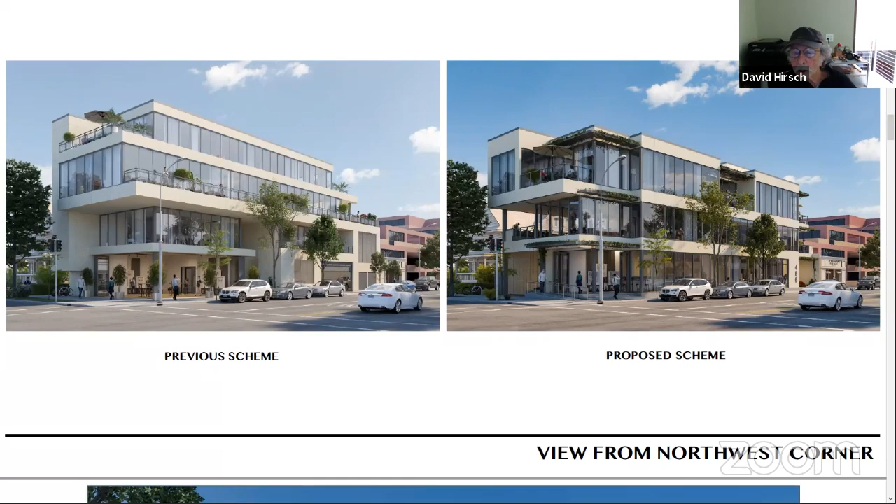And then if you flip back to the opposite one, Sam, the other end. Anyhow, what we're looking at here is no differentiation between a commercial storefront look and residential area. And I find that to be a problem with the scale, and that's what we talked about, I thought, the last time. The scale should change at some point when changing the use of a floor. I don't know if everybody agrees with me. Yeah. Yep. Yeah.

It just seems to me, just me here. Sorry, David, that last bit is hard to understand. Try it again. Can you hear? I think if you lean forward, you're closer to your microphone. It's a little easier to hear you. Okay, maybe it's this way.

There really should be quite a change in scale, I think. You know, I note the building that's on the corner next to City Hall, the new one on the corner, adjacent to it. The whole of the top floor is residential, quite substantially different than the commercial down below. I find that there ought to be a change in scale based on the kind of change in use, significant change in use. But it is exactly the same all the way through this building.

So it really gets to me to make it monotonous. It would be so much more interesting if there were a change in scale. But there is a conflict on the second floor between commercial and residential, and they look exactly the same. I'm really bothered by that.

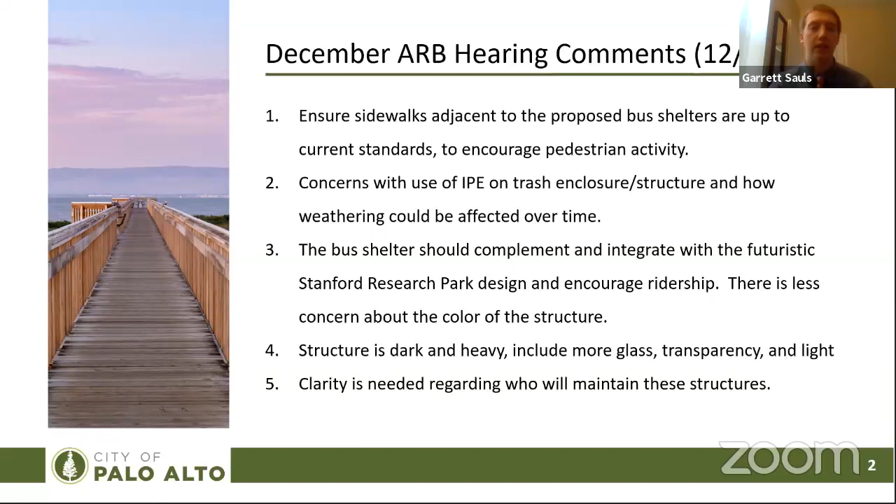The other significant comment the board provided was that the structure before was a little darker and heavier, and they wanted to see more glass and transparency and light brought into the structure. And so those will be shown shortly. And lastly, there's some clarification that was needed about who will be maintaining these structures. So Stanford has a third-party agreement with VTA Real Estate to be maintaining and installing these structures over the life of them. And that is reflected in the conditions of approval that would be maintained. And so you should be able to see that in the staff report as well.

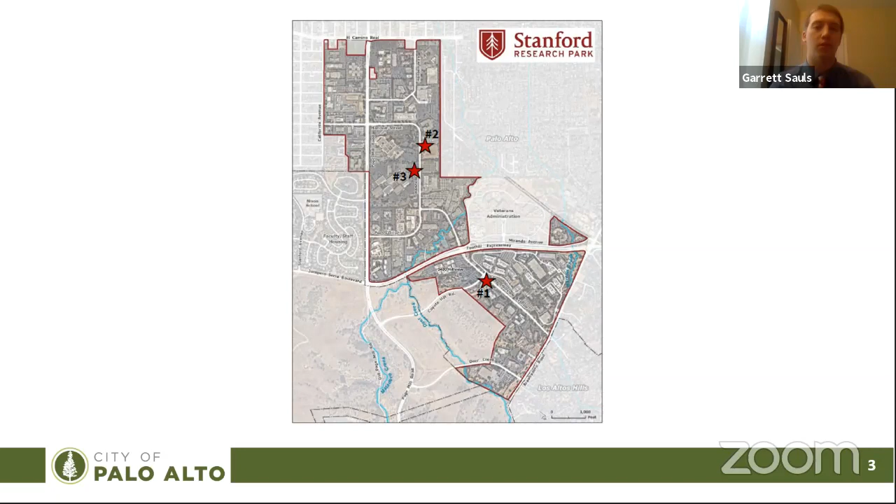So for the 3 sites that we're talking about today, they are 3380 Coyote Hill Road, 3223 Hanover, and 1501 Page Mill. 3380 Coyote Hill is the #1 star that you see down here. 3223 is #2, and 1501 Page Mill is #3. So you can see here some of the older structures that are present at the site right now on Coyote Hill. You can also see that there are other sites that either just have a bench, or other sites within the research park that don't have any sort of covering at all, or any sort of bench either. And so this shelter would instead serve to replace all of those and make the accommodations for bus travelers more inviting and welcoming and comfortable.

Some key considerations for the design. This design will help inform staff in creating a consistent design to go throughout the city. Transportation has been working a little bit with VTA to figure out what are some opportunities within the city that this kind of design or concept could be implemented so that we can have some updated shelters, because we do see a number of bus shelters within the city limits outside of the research park that are also in fairly similar conditions. As was mentioned before, all of these sites would be upgraded with ADA upgrades, photovoltaic panels, and include waste collection facilities, and be maintained by Stanford so that there isn't waste collecting in the area or any sort of damage or graffiti finding itself at the sites.

Overall, the materials used are of high quality and long-lasting nature. There's a reduction in the IPE wood material and an increase in the glass used on the site to help make that structure more transparent. Since the original design was brought to the board, Stanford changed it so that it would be a silver aluminum metal material, and so staff doesn't have any concerns about the color choice that has been presented. And our last motion is that we'd recommend approval of the proposed project to the director based on the findings and conditions of approval that are in the staff report.

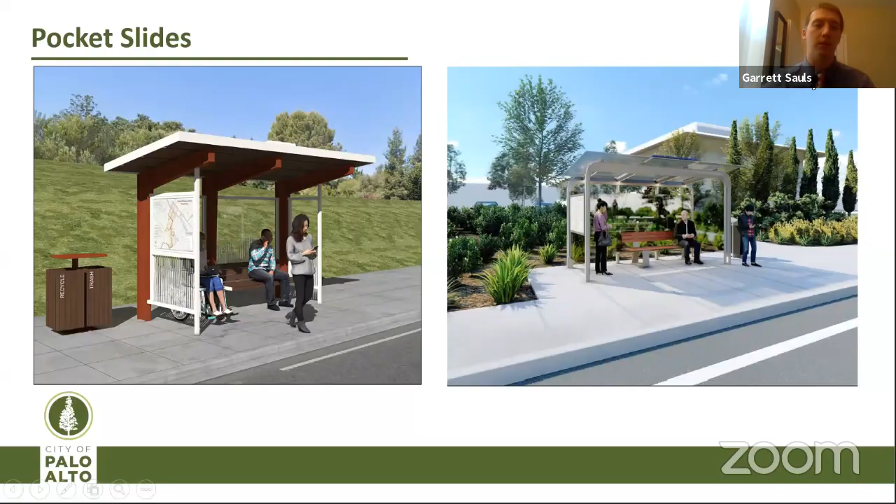So with this design, you can see on the left-hand side was the previous design that the shelters include, and I'll scroll in a little bit so that it's maybe a little bit more apparent. On the left-hand side, you see these structural beams that are coming here in this wood panel underneath. On the right-hand side, you'll see now that the structure is presented to be much more open. There's a significantly greater amount of glass on each of the sides and on the roof material to allow for a lot more light and transparency, as the board had asked for previously.

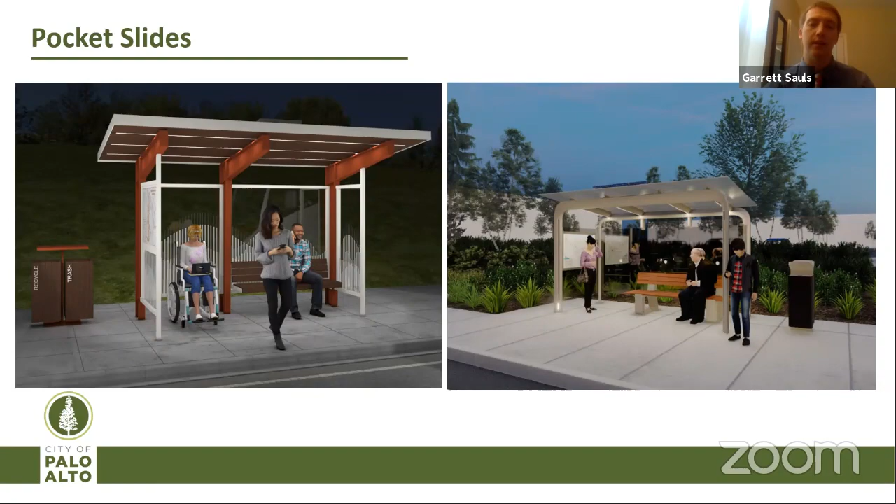And we can also see a photo simulation of what the structure would be looking like at nighttime as well. And that concludes my presentation.

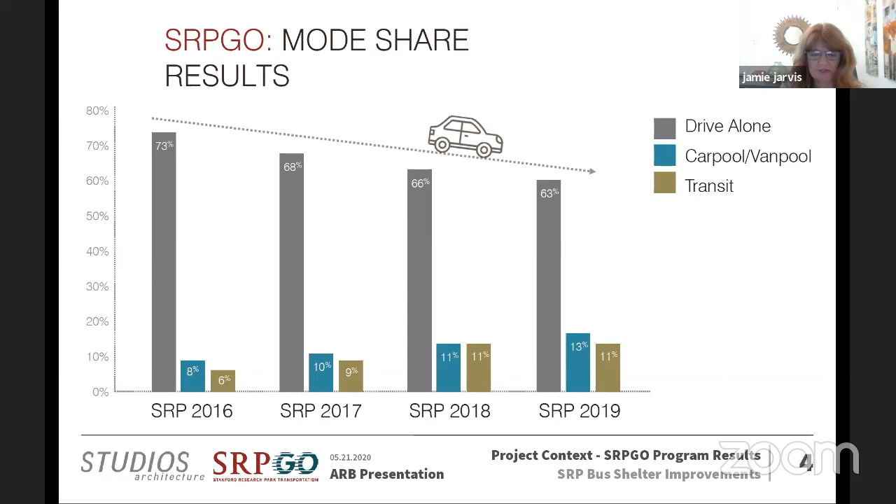Next slide, Jason. Our efforts have reduced solo driving by 10 percentage points over 3 years and nearly doubled transit use from 6% to 11%. We're very proud of these accomplishments and are committed to further increasing the use of commute alternatives. However, we feel the current state of the bus stops throughout the research park limits our ability to increase transit use. Next slide. We currently have a mishmash of aging and unattractive shelters, and some of our most well-used transit stops have no shelter at all. Next slide.

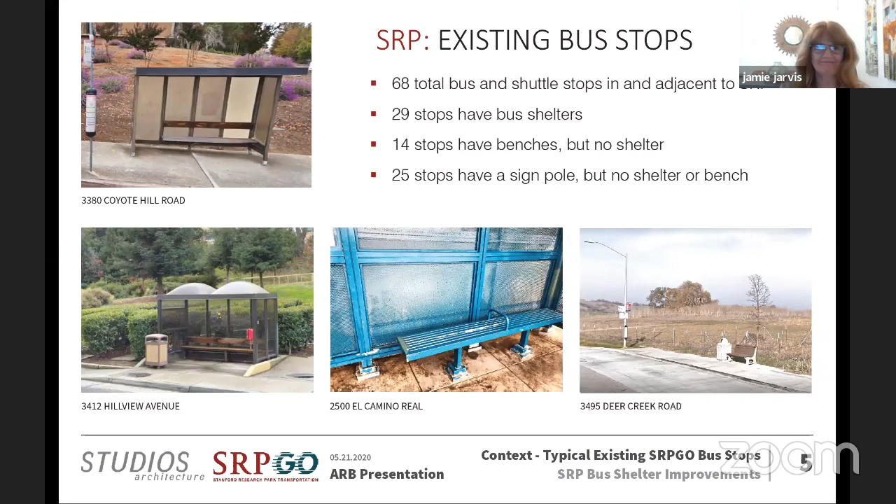We believe attractive, functional bus shelters are key to attracting new transit riders. And for this reason, we propose to install new high-quality bus shelters at 3 locations along interior roads in the research park. When we first presented this project to you last December, you were supportive of having new bus shelters in the research park, but weren't thrilled with our custom design and specifically asked for a lighter and more modern shelter. The shelter we're proposing to you today is a Landscape Forms design that we believe reflects your guidance.

The shelter is already installed in 2 locations in Palo Alto along Quarry Road and has also been specified as a condition of approval for the 3223 Hanover project. We envision that this shelter will become the preferred option for future shelter replacements and additions in Stanford Research Park. I appreciate you allowing me to provide the context for our shelter project. And at this time, I'd like to introduce Jason McCarthy, Principal at Studios Architecture, to present the design.

Great. Thank you, Jamie. And it's a pleasure to be with you and present this on behalf of Stanford. We've been working carefully with Stanford on the development of the design and essentially exploring options following up on the conversation and the discussion that was held in the first hearing. And what we're coming forward with today, we think addresses all of Stanford's goals for the project in terms of the transportation goals that Jamie's outlined.

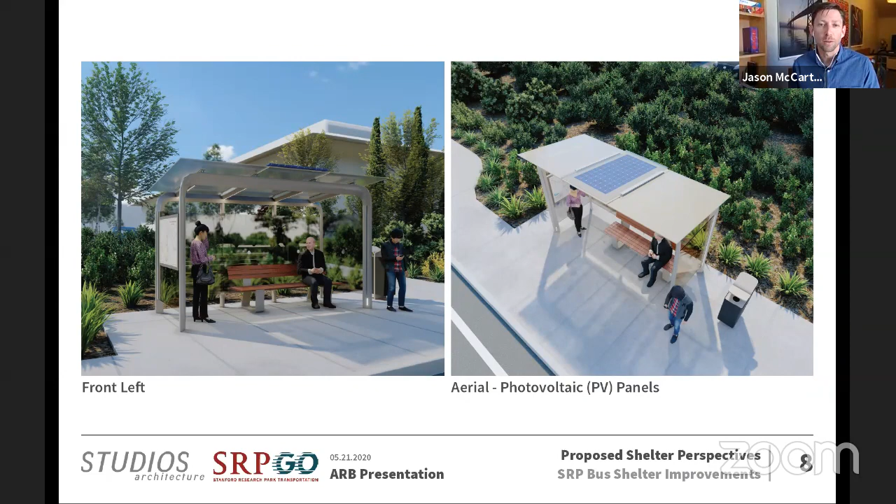A little bit more about the design that's proposed. We are including a small photovoltaic array on the roof of the canopy, and that photovoltaic helps this shelter operate off the grid. So the lighting that's integrated into the structure will be energized by this photovoltaic array, a very low energy consumption system and very high sustainability, in keeping with what we think are the goals of Palo Alto and Stanford more broadly.

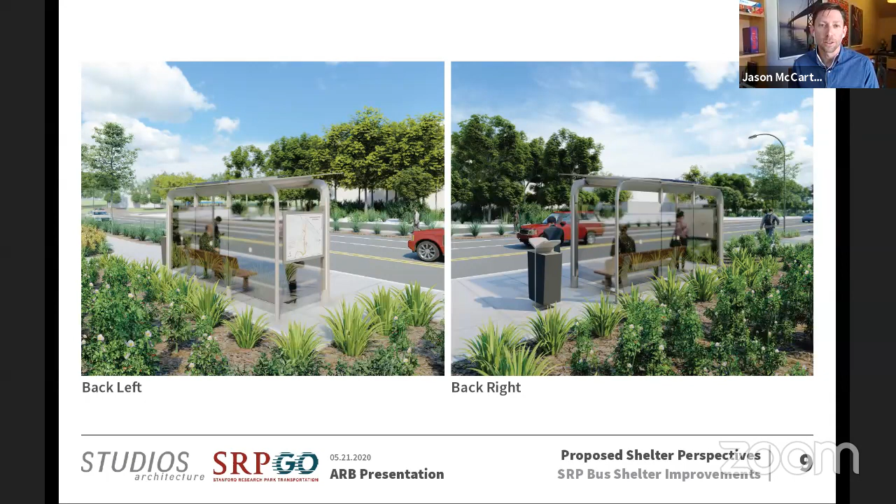Again, the glass surround is very transparent, glazing with distraction dots for safety, but that high transparency we think allows for a lot of natural light, but also provides safety from a visibility standpoint. We think it is very functional in terms of ease of maintenance. The glass at the canopy has a translucency to it, so that provides a good amount of shade while still bringing a lot of natural light through and creating comfort for the rider who's waiting for their bus.

The materials that are proposed, again, are very simple and elegant, we think, a very forward-looking palette. The silver metallic frame and other metal components of the shelter is the primary material, which we feel is timeless and consistent with the feel of the research park in general and these sites. And that metallic framing element is accented by the ipe that you see on the wood bench, and then the black plastic trash and recycling containers in that receptacle design.